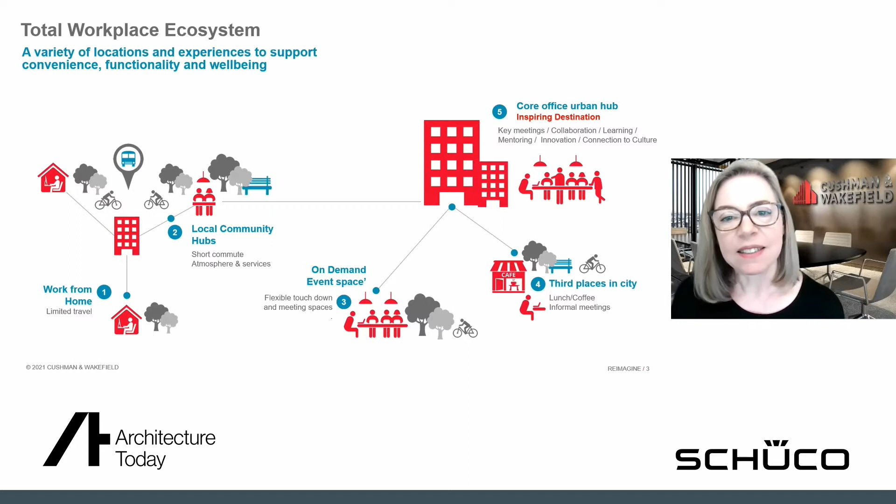But it has an important role to play as part of a much more complex workplace ecosystem, a variety of locations and experiences that will support convenience, functionality, and well-being. That is likely to be our home, areas within local communities that allow us short commutes but still access to people and services, on-demand event space, third places in cities. But critically, the office still becomes a very important destination, an inspiring destination to support collaboration, mentoring, learning, and innovation.

This is very important in terms of how we're going to design for the future of offices. But we need to think about what that means. When we talk about an ecosystem, we hear a lot of press at the moment around whether people are coming back to the office or working remotely. And we like to stress that the future is not binary — it's not either being in the office or being remote.

When we look at data on engagement, the diagram on the left, a Gallup poll on engagement, indicates that people who are in the office all of the time or in the office none of the time have the lowest engagement scores. It's really when you're in the office about 60 to 80% that your engagement score peaks.

When we look at what corporate occupiers are planning, the diagram on the right is some joint research we recently did with CoreNet. You can see on the left-hand side that corporate real estate executives were estimating hybrid work expectations to be 29% pre-pandemic. Since the pandemic, they see that moving to more than 80%. So people working in a dynamic way will increase to about 80% possibly — that's a big, big amount of people.

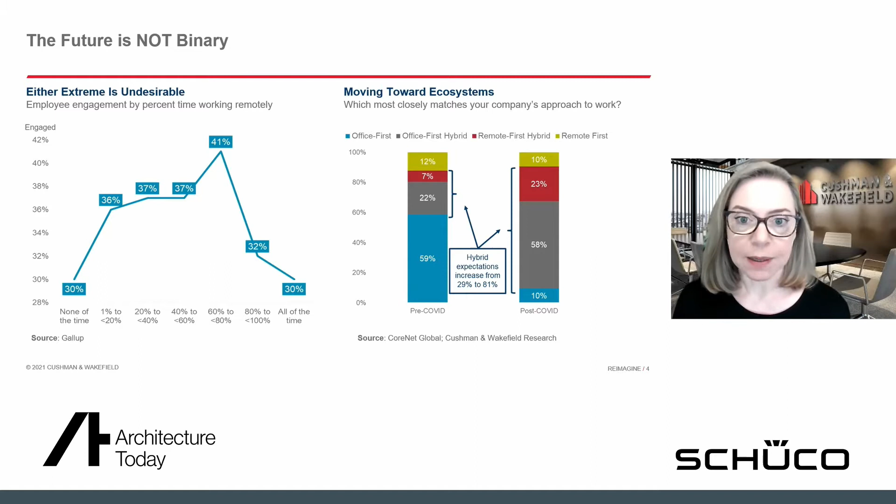What's critical to understand when we look at so much more of the office population having flexibility and working in a more dynamic way is, what does that mean? So we did some modeling to understand the probability of running into people when you reduce your office attendance from 5 days a week to 2 days a week. When you come into the same workplace with your colleagues 5 days a week, your probability of running into people is about 88%. When that is reduced to 2 days a week, that drops to 29%.

And even for smaller teams, the probability of 50% of the team being in the office on any given day drops down to 12%. So what this is telling us is that whilst we want flexibility, it is absolutely critical for that flexibility to be actively managed, so that when we do come into the office, we are running into and meeting the people that will drive our engagement and effectiveness to do our work better.

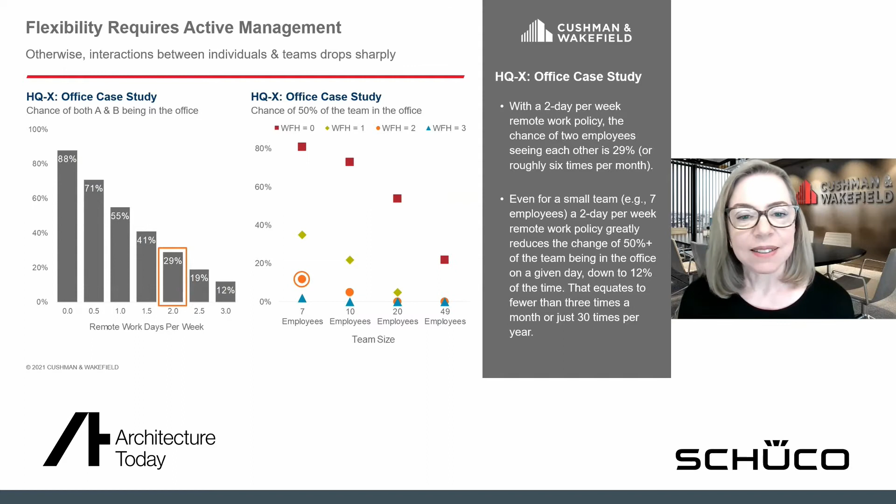This is a very important issue as to how we plan for the future workplace. What we're currently doing is we have pivoted our Experience Square Foot into 2.0, which begins to develop different profiles to define particular workplace components appropriate to who will come into the office, why they come in, what happens when they're actually in the office, what tasks they will be doing, and how the office is designed to respond to those tasks, while ensuring we're supporting virtual work.

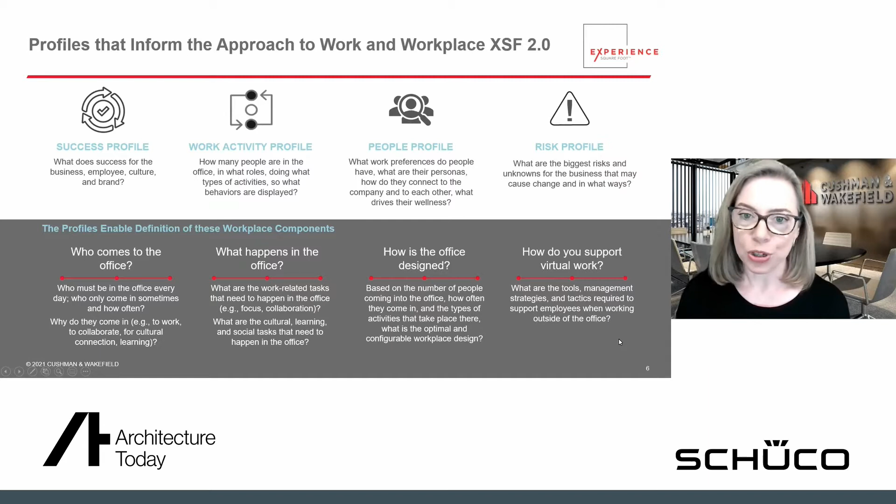This is driving us to look at a number of potential implications. The way space is currently allocated is no longer going to be viable, but we're seeing two different optionalities. Organizations are either realigning space — so within the same footprint, driving up more shared and amenity space to enhance connection and collaboration — or they're optimizing both space and experience by leveraging that ecosystem of different work environments, regaining things like lost commute time into productivity, and enabling their colleagues to use less space, but in better ways.

What that means is we're starting to look at interesting implications in terms of the importance of more blurring of activities, the ability to think about how we work, live, learn, and combine leisure across not just buildings but city quarters. The importance of looking at the workplace will not just be about the workplace itself, but actually the surrounding area, the amenities, the experiences that inspire people to come to the office.

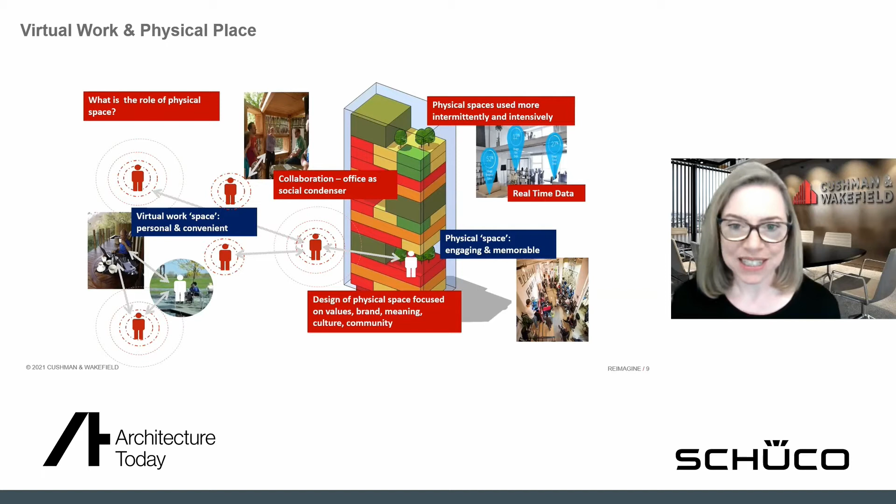So what does that mean in terms of the emerging insights? We're certainly at a place where we can begin to make hypotheses about what activities we can best do in person, such as knowledge transfers, collaboration, social interactions, and what the actual physical characteristics we need to design to enable those will be.

One of the most challenging will be the activities we do in a hybrid way, meaning some people will physically be together while others dial in remotely. So how do we create frictionless, equitable experiences for people in the room and for those not? That will require new types of interactive project spaces and meeting rooms with video and smart boards to create that same level of digital equity we've experienced through virtual collaboration in the last year.

And then lastly, understand the activities that can best happen remotely, such as process-driven or formal meetings or focused work, and where those will happen, most likely in people's homes or third spaces, and how we support them.

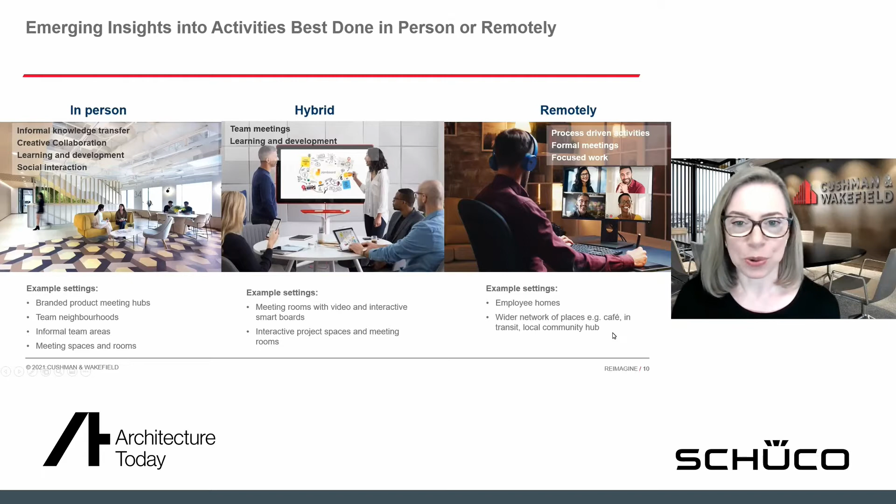When we look more specifically at what this might mean for interior space allocation, typically today 60% of office interiors are allocated to individual workspaces. We expect that to be reduced to about half that amount. That space will be redistributed to collaborative workspaces, which will make up about half the space in buildings, and to support spaces, social spaces, and well-being, which will increase from about 5% today to about 20% in the future.

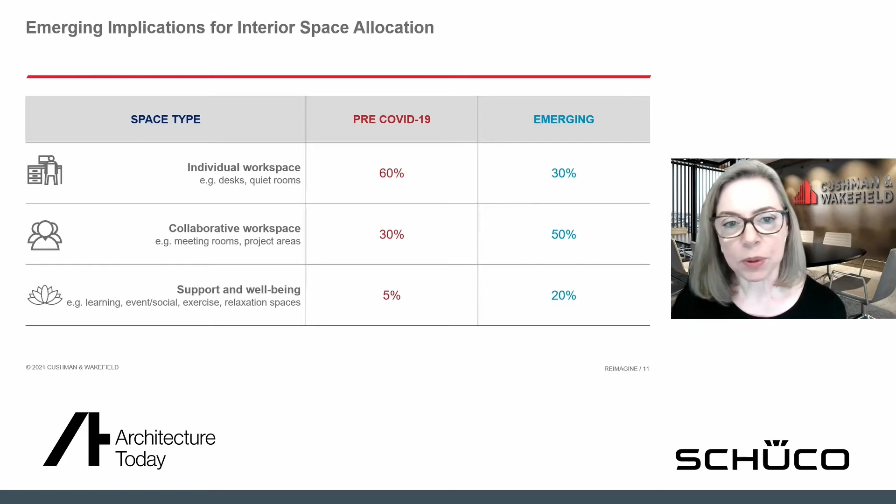The next set of implications are really exciting, and this is around emerging technology, real-time data, and user interfaces. I think this is where we'll find the most evolution in the next few years. Our ability to use real-time data to support well-being, how the building responds to our well-being. Interior air quality is a great example.

We've all become air quality experts in the last few months, so being able to track how air quality in the building affects our day-to-day work will be amazing. How does the building respond to our experience? Health and safety, testing and tracing—we've already seen many landlords and many occupiers put this in place.

The second layer, which technology can really help us drive, is optimization of both space and carbon. The ability to manage with real-time data, space and capacity management, building access, and energy and sustainability targets will only increase as we move forward.

And the last pillar will be around engagement. How do we ensure people can find their team, can have effective collaboration? How do we manage communities and hospitality and hybrid working effectiveness? These are really amazing areas of innovation at the moment, and I think there's a new app almost daily being launched to try and support one of these initiatives.

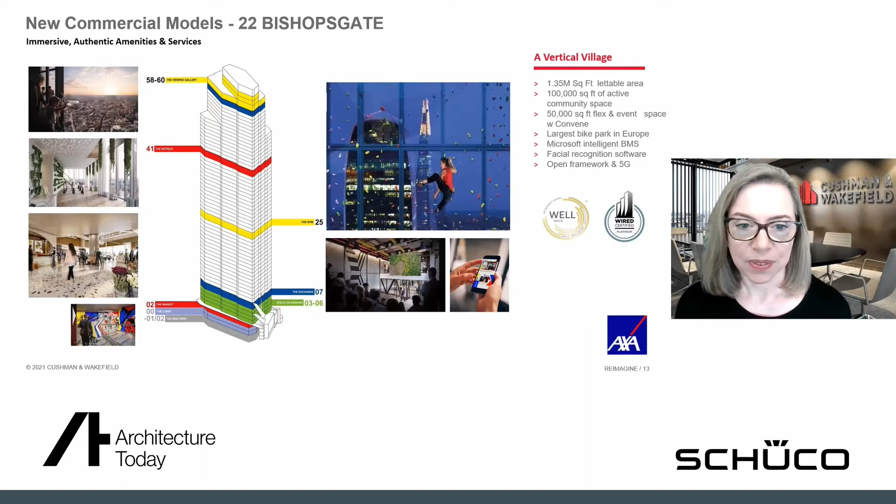What we're seeing in this type of model is a building that pulls together all of the trends we have seen in recent years, which in a post-pandemic world are no longer trends. They will now be basic expectations, because occupiers will expect their landlord to provide more than just a building, but a destination that is managed and curated to create unique experiences for their people, to bring that social condensing I described earlier, and at the same time, to support their agility, flexibility, and resiliency to changing business demand.

As we look to this type of building and these types of expectations, we will increasingly be shifting our expectations of performance from cost to value. It is not good enough anymore to just reduce space and reduce cost. It is important to focus on reducing the right things. So decreasing useless space, wasted time, absenteeism, stress, carbon, and outdated policies, and instead focusing on both individual and team productivity, but also inspiration and experience through increasing employee engagement, inclusion, ideas, collaboration, trust, resilience, and well-being.

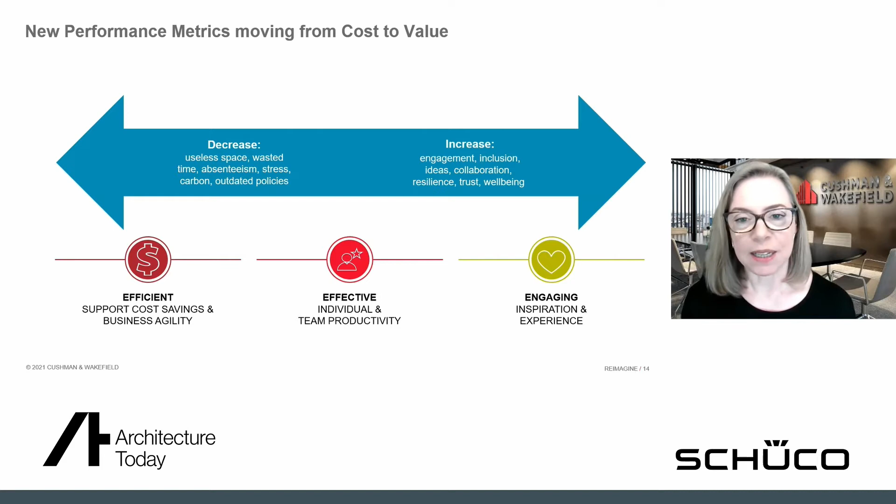The role of buildings to drive this moving forward will be critical. But in order for us to design a successful transformation towards a hybrid total workplace ecosystem, we need more than just the design of buildings. We need an integrated, multidisciplined approach that brings together a variety of what typically would have been diverse functions and budgets, aligned to goals that drive towards employee experience.

It's important to recognize that when we look at savings in any one of these areas, we need to reinvest in another. And in order to do that, we cannot take an approach that gives us a final design solution, but we need to take an agile product design approach, an iterative design approach to introduce hybrid working pilots, to test and iterate and engage the workforce and employees actively.

Move-in is no longer going to be the final objective, but move-in will be just one step in the process. And I think it's going to be a very exciting time to create very dynamic and iterative building solutions. Thank you very much.

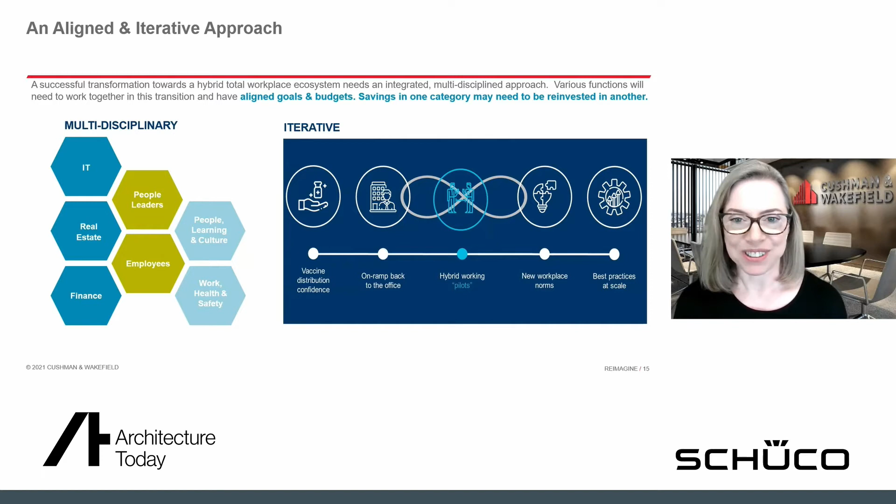Thank you, Despina. That was fascinating, not least because of the enormous amount of research you've done. I don't think I can even name 100 countries. But I was interested that actually a lot of what you said in this research seemed to confirm things we felt instinctively. And I just wondered, what surprised you most in the research?

Two things surprised us. First was the experience of younger people. We assumed that younger people, being more tech savvy, would actually adapt to remote working better. But what we found, given the challenges I raised earlier, was that they were struggling the most. They were missing social capital within their organizations, and they were missing space at home, and all of the things that help them build their careers, like mentoring and making those connections.

Baby boomers, on the other hand, who were the most skeptical around remote working, had the best experience of all, because they had both the social capital and the space. Now, that's a great opportunity because, of course, baby boomers still are the main decision makers in most organizations.

So given that sense of comfort that they've had in the last few months, that should help accelerate the process of new models moving forward.

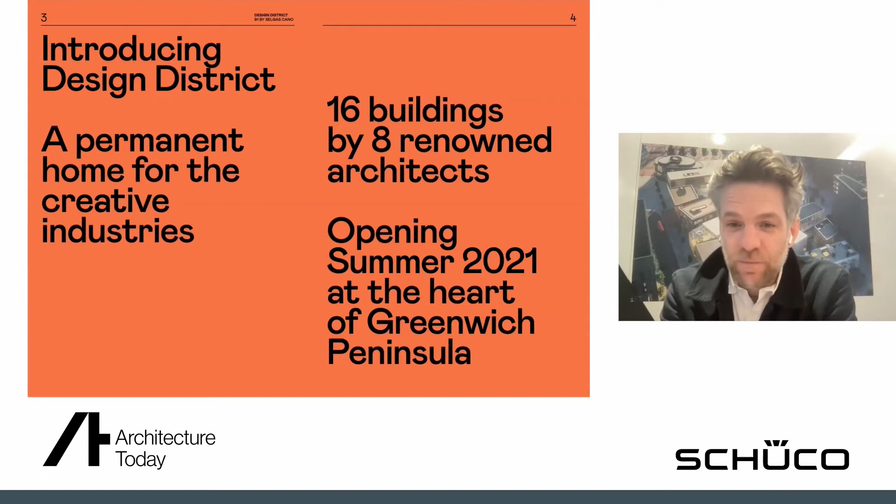So I'm here to talk to you a bit about the Design District, which is a permanent home for the creative industries. It's 16 buildings by 8 architects, opening this summer at the heart of the Greenwich Peninsula. For those who don't know, the Greenwich Peninsula is one of the largest regeneration sites in Europe, certainly in the UK—a 150-acre site. We're building 15,000 homes over the next 15 to 20 years. It's had a gross value of about £8.5 billion, and we're surrounded by 1.5 miles of the River Thames. Probably the easiest way for you to locate it in London is you can see the dome at the top and the proximity to Canary Wharf.

We currently have probably about 5,000 to 6,000 residents on site. We've built nearly 4,000 homes. Obviously, the O2 is a major attractor to the site, and the Design District is probably our first major mixed-use scheme in terms of bringing employment to the peninsula as part of the wider master plan. You can see the Design District is just hidden in there, right at the heart of the peninsula.

So in 2015, we commissioned Allies & Morrison to do a new master plan for the peninsula. Originally there was a master plan by Terry Farrell, done shortly after the millennium. We took over the scheme in, I think, 2013. Knight Dragon took over and redesigned the master plan in 2015 with the Design District right at the heart of it. The idea behind the original master plan was to increase the residential capacity on the site, but also reorganize the employment uses.

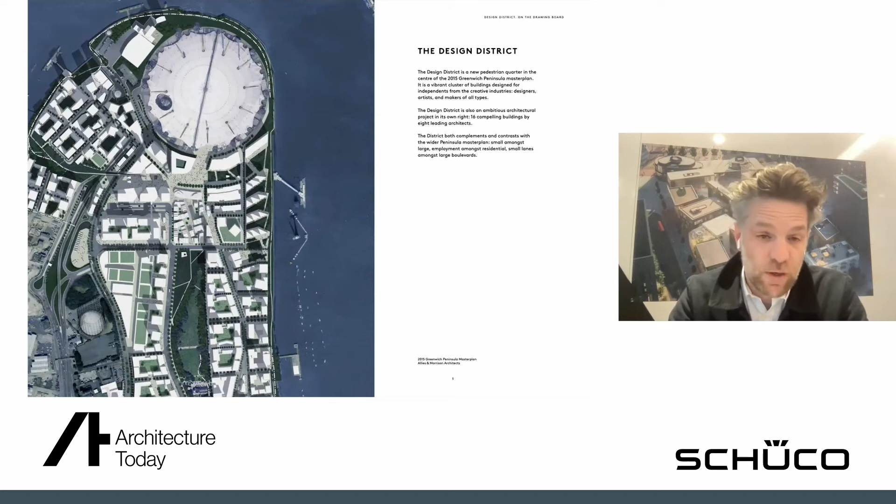And we then started really to focus on how we could attract the creative industries to the peninsula and what type of environment they would want to be in. So at the outset of the project, we set out some key principles.

And the first one was that it really had to be low cost. We had to have an affordable entry point for the creative industries. We know how tough it is in terms of some of the rents in London for creatives and artists to find a home, certainly within zones 1 to 4. And so that was really important.

The other thing we wanted was it had to be diverse. We wanted a diversity of occupiers, and we wanted it to be productive. So the idea that people actually made things - instead of sort of made in the UK, it would say made on Greenwich Peninsula, made in the design district. That was a really important idea.

And that it was small scale. So the buildings on the peninsula are predominantly tall buildings. And obviously we have the river around us, we have this fantastic light, and you have an environment that can take that height. But we wanted a neighborhood that was really a counterpoint to those, and that we thought would create a kind of human scale and intimate environment for people.

We also wanted it to be open, so that it wasn't just a single building carved up into lots of smaller studio spaces, but that it was a place. So it had streets and squares, it was accessible, it was immersive. And that's the last principle - that it was a place you could discover, you could wander around, and you could find the things that people were making, or find an interesting space to be in.

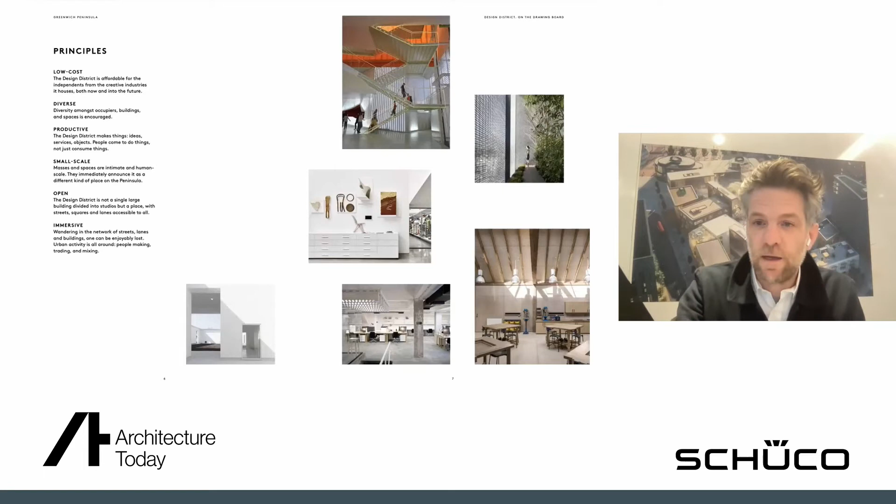At the same time, we started to try and think through how those buildings might work. And in terms of the vertical trend of the buildings, we thought that on the ground floor, where things needed to be noisy and messy, where there were workshops, those should be based on the ground floor, so they could open out, and that those floor plates could accommodate heavy things.

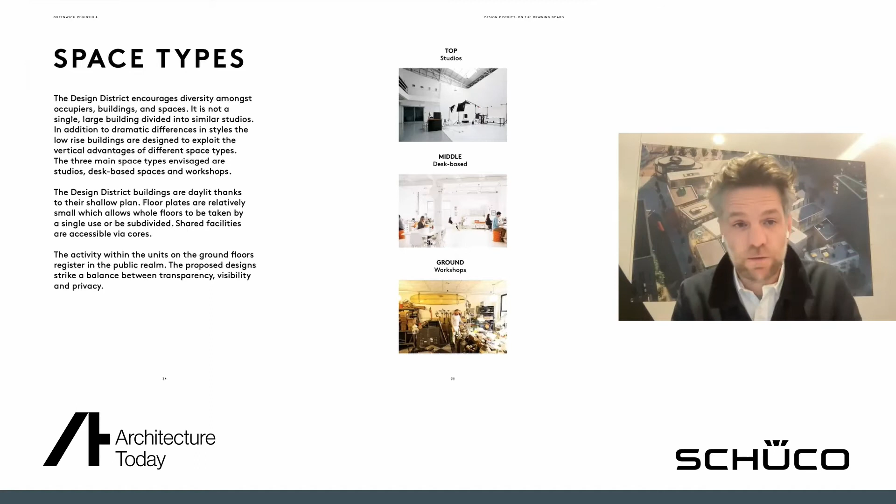Then on the middle floors, we felt that those needed to be more adaptable, so they're open plan, there's more desk-based activities. If you're a graphic designer or a fashion designer or an architect, you might come into one of those spaces. And then on the top of the buildings, we wanted to really take advantage of the natural light, the studio spaces, so they were well lit, and we thought of those as being predominantly photography studios or painting studios.

And those elements all fed into the brief, alongside wanting to take advantage of some little moments where we could, so that there were roof terraces where possible, that the courtyards were a really important part of giving the environment to the buildings and the character to the place, and that we could find efficiencies where possible within the buildings.

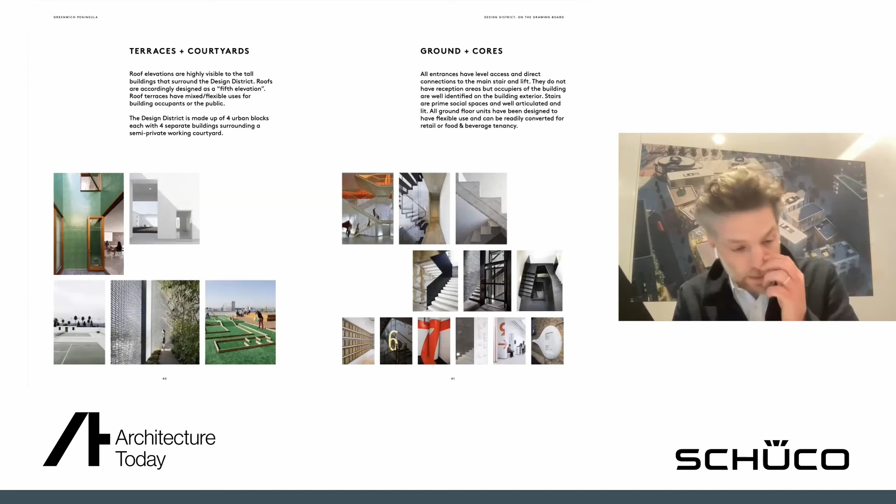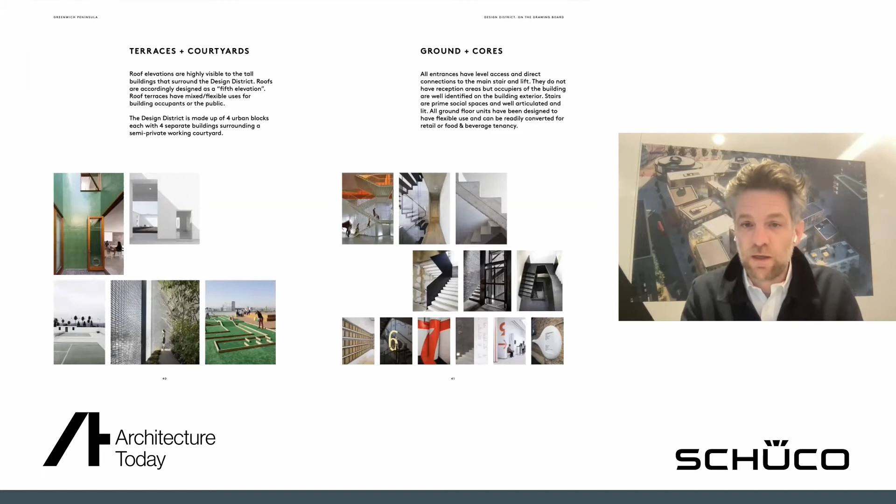So within the cores, for example, the buildings are shallow floor plates, so there is only one means of escape, which is the central core - one lift, one staircase. The entrances are self-managed, so there isn't a receptionist. If you ring the buzzer, someone will come down and open the door for you. And so we wanted to keep things as lean as possible. And I think that was really also speaking to keeping those rents low. That was that core driver.

We iterated on the master plan a great deal. And that focus on thinking about the elements I just discussed really brought us to a set of buildings which had these shallow floor plates - one that was to allow for natural ventilation, obviously that single core, but also it started to form an environment where we could carve out those public spaces.

So there's a central courtyard or a central main square, which gets 50% of direct sunlight at lunchtime. That was the key, that we wanted that pocket of sun for people to go and find in the middle of the day. And then there's 4 courtyards. And so you can see these clusters where the working courtyards are, and that's where those ground floors can spill out into those maker spaces.

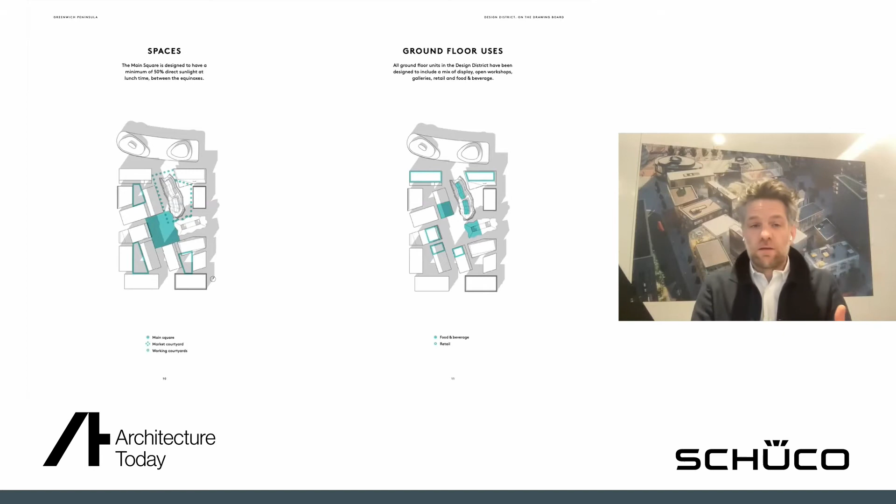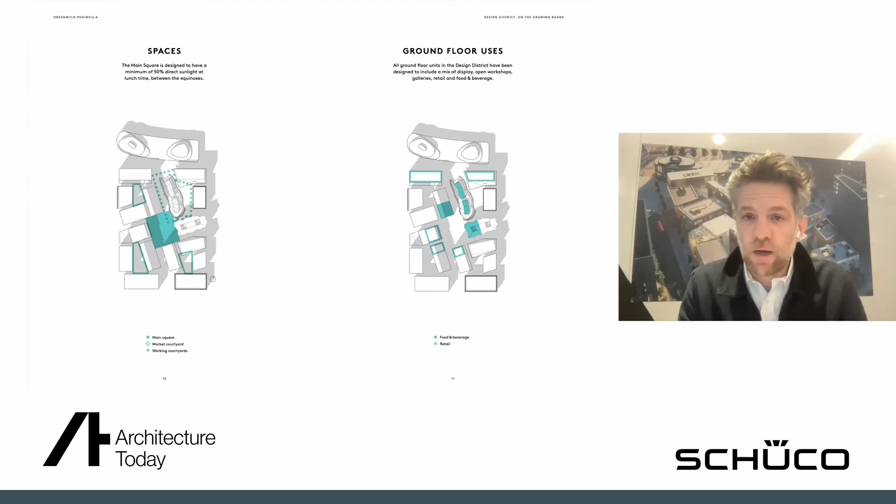Alongside those small buildings, we wanted to activate some of the ground uses, as well as there being workshops. So the idea was you could have some food and beverage, a cafe, some retail, and while they might not immediately come in, there was flexibility within those floor plates to activate those ground floors.

The other important aspect is that the district is fully pedestrianised.

There is a service route to allow for servicing at fixed hours, so deliveries can come in out of hours. If you're a furniture maker getting your furniture collected, that's pre-booked. Daily deliveries are organised by vehicles coming to the side of the district, with guys delivering packages to the buildings individually. So minimising vehicle circulation was a must. There's plenty of bicycle parking, so it's very much focused on the pedestrian environment.

There were other constraints to take into account, one being the Silvertown Tunnel, a major project coming, so the two buildings on the southern edge of the district will come in the future. Also linking into the Tide - at the time we were doing this project it was called the P5K - which is a major walkway by Diller Scofidio, looping all around the peninsula, and it needs to tie into the district in the future on that eastern edge.

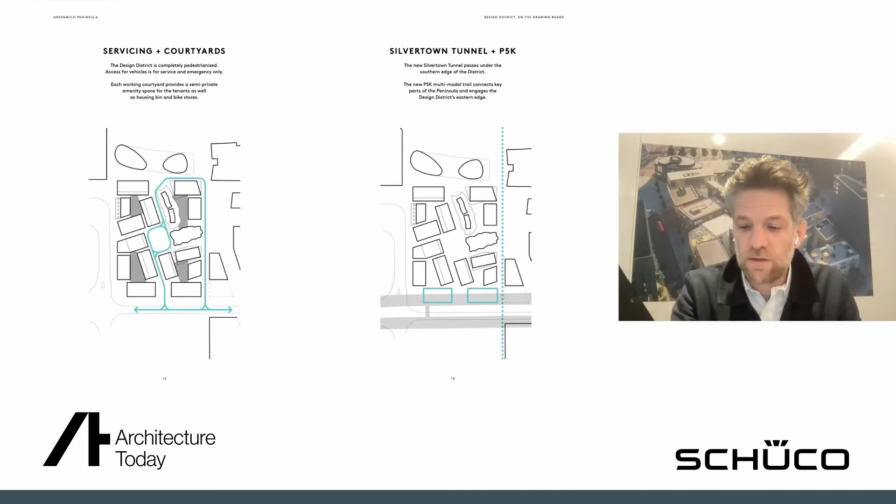Now, with the framework established, a brief for our architects, and a master plan emerging, the thing to do next was pick the architects. As a development business, you can imagine it took quite a lot of convincing to the development team that we would work with eight architects all at once.

But what we wanted to do was create a real mix of styles, and we did that purposely. We wanted to juxtapose these different voices and create what I refer to as wit and mess - cities are messy places, full of different idiosyncrasies of different types of buildings. One of the precedents we used to talk about for the project was Neal's Yard in Covent Garden, where you walk down a little side passage and the courtyard opens up, with lots of different colours and details within the buildings.

I think if you asked someone which bit of a city they like best, or their favourite part of London, they're more likely to choose a part of Camden, or Southwark, or a favourite courtyard in Clerkenwell. So when doing a project completely from scratch, we tried to find a way within the design process to capture the grain that builds up over a long period of time, but bring that into the development right from the off.

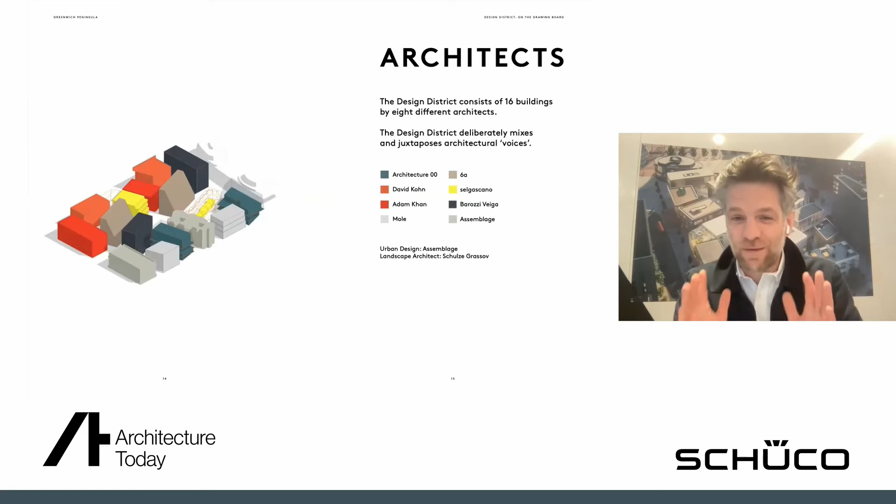I'll try and mention one as we go through the images. I haven't done these in order of preference, I decided to do them alphabetically. That was probably the fairest way to go through.

This is 6A, and they treated their buildings exactly the same. They chamfered the facade backwards to take advantage of the northwest light. The top floor is a 7.5 meter high studio, so it's a great event space with great natural light. In fact, we've got a photography studio looking at one of the spaces now. The buildings are a pair, so I'll show you the other one, which is green, this one is red. They're terrazzo covered with an aluminium facade to the other three sides of the building.

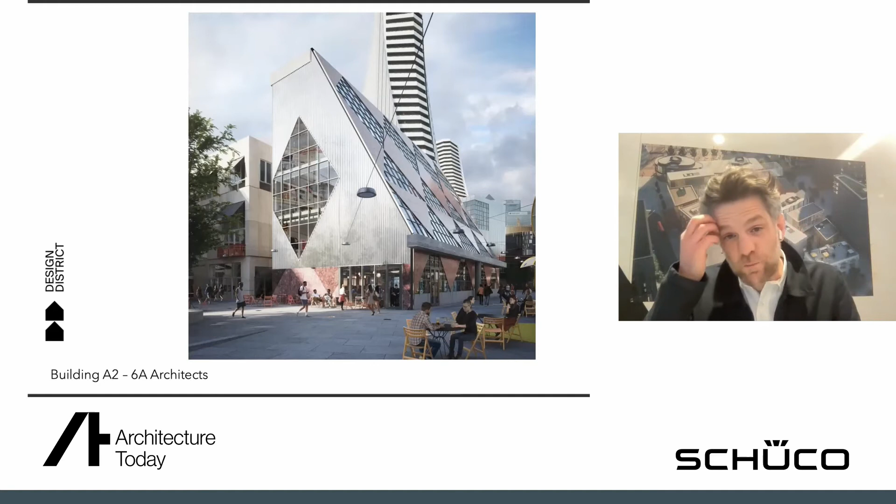When they chamfered their building, Barozzi Veiga, in the building in the background, had put in this huge corner window. They didn't know 6A was chamfering their building, but what it did was create this wonderful vista down the street. That was one of those moments of serendipity, where elements just arose by chance, and then were engineered by us along the way.

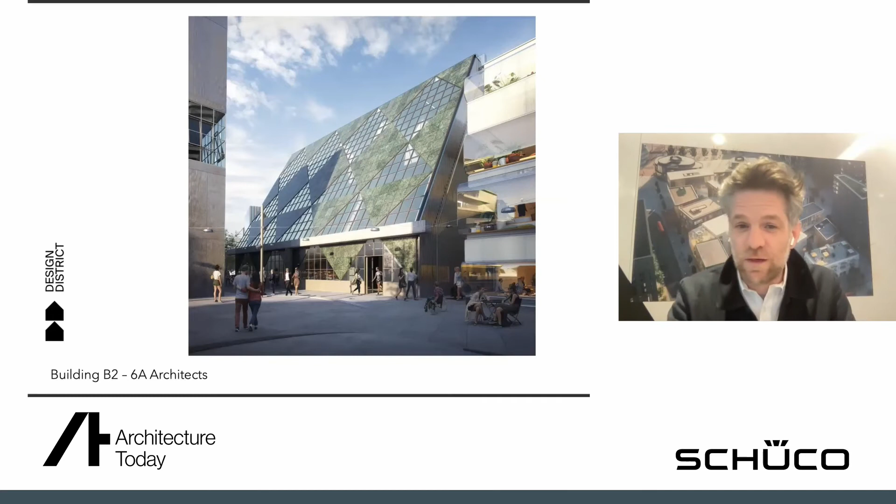They were great to see as they came forward. This is the other pair of buildings, and 6A really did talk about a pair, like the buildings at the Greenwich Maritime Museum seen as a pair, like pairs of London buses that always come along at once. That was a theme that ran through, whereas other architects treated their buildings separately.

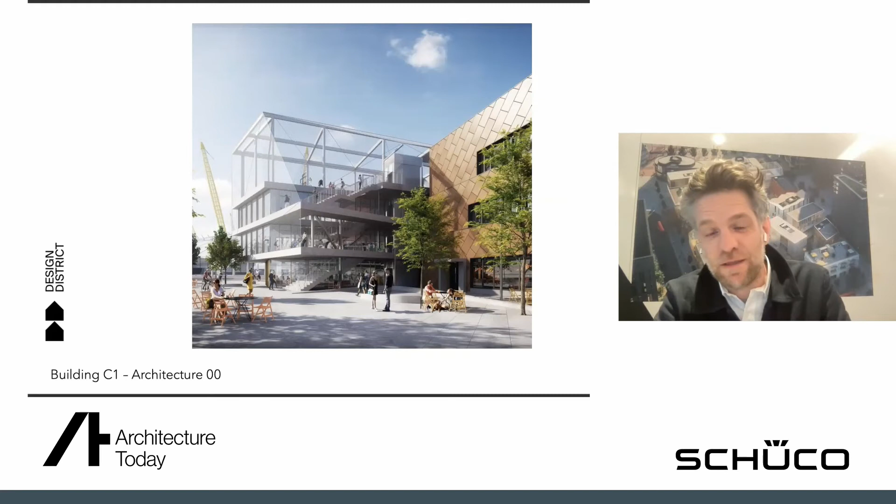Architecture 00 wrap their buildings in mesh, so all the circulation on this building is outside. That arose out of an argument with one of the development managers, who said they had too much circulation inside and not enough rentable area. So they put all the circulation outside, and in doing so allowed access to a public basketball court on the roof.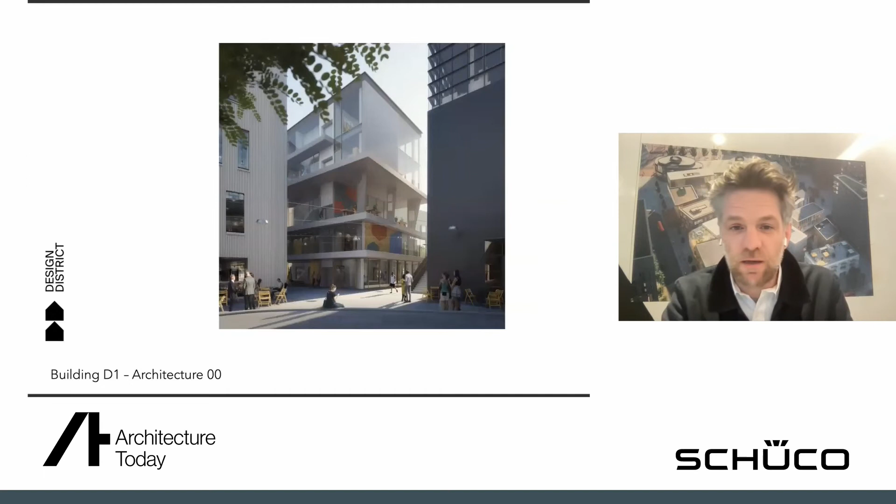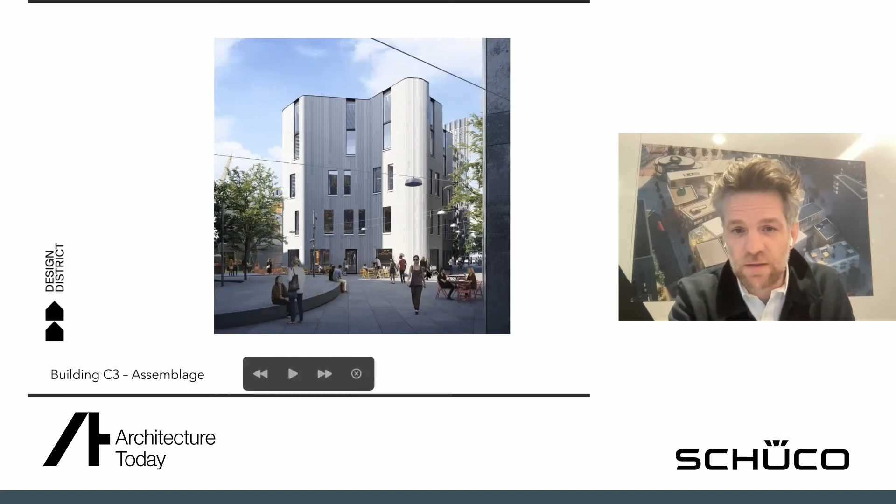Assemblage, the practice now called HNNA, rebranded this year, created this curving facade that allowed views in all different directions. Again, they took advantage of great top ceiling heights, with a big vaulted space at the top, and a double height space at ground floor addressing the main square where there's a cafe restaurant.

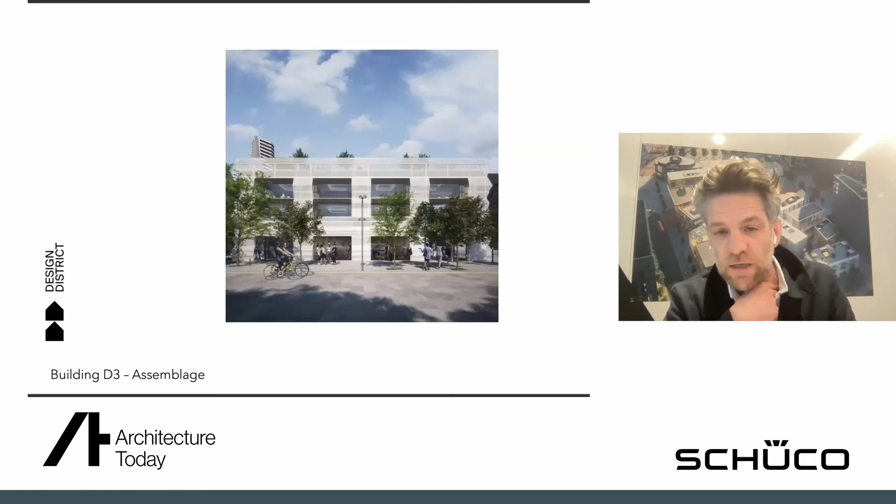This is the sister building, right to the south of the site. It has some external circulation, but really great studios overlooking the park, with this metal mesh providing solar shading to those spaces.

Barozzi Veiga, this building has already opened and has our first tenant, Ravensbourne Art College, who've taken it as their Institute of Creativity, their new postgrad and commercial offer coming out of Ravensbourne Art College.

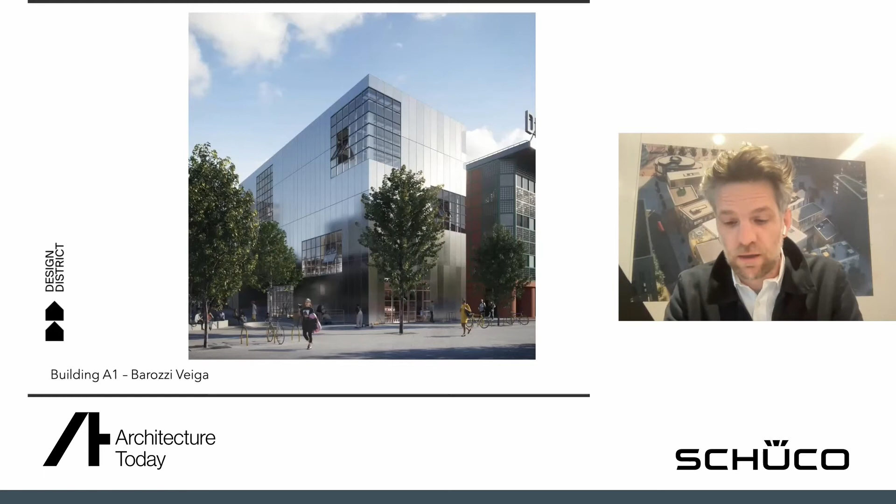This was really about simplifying the form of their building as much as they could. They pared it back, all about the massing and the end elevation, to the most simple form they could, then spent a lot of time playing with window and opening sizes to create the spaces. This roof space, the top floor, also has a 5.5 meter high ceiling. A really great space.

This is the sister building again, pretty much the same configuration, the same work on the end elevation, just clad in a different aluminium cladding - this is black rather than silver. Now, Adam Khan's buildings.

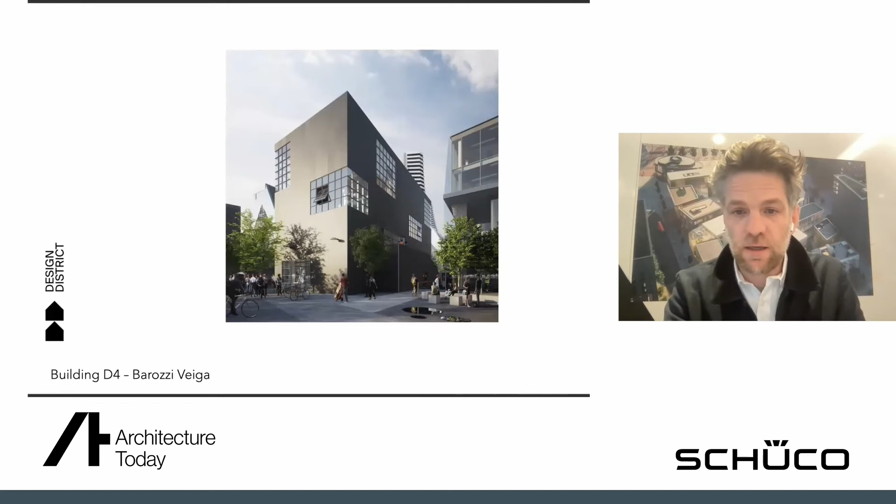This building is concrete, poured in situ. You can see it steps out subtly on each floor, but the walls are also poured in situ as well as the slab. This was all about that construction process, how the details evolved out of the shuttering, and leaving the imprints of the mess and some of the imperfections you get from pouring concrete.

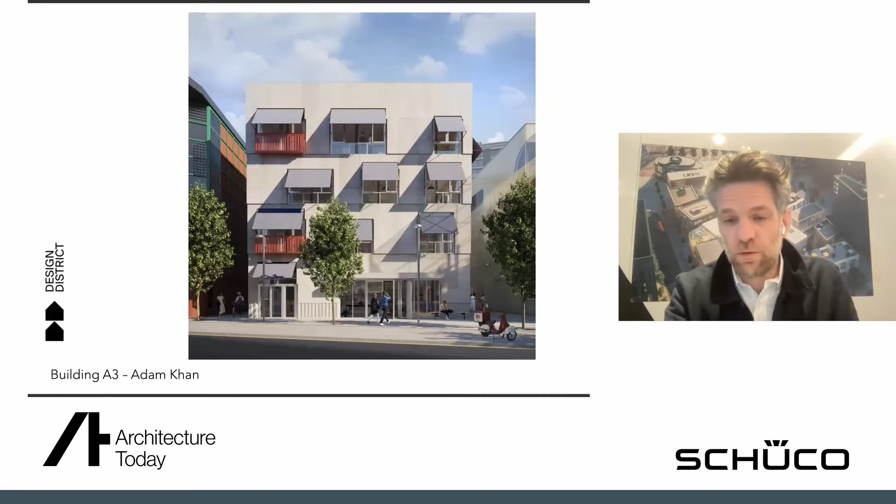This is the other building to the south of the park. Initially, he was hoping to clad this in metal when he first conceived it, but because the Silvertown tunnel sits underneath, we looked at changing this to a timber structure.

And so now actually this is a timber slatted CLT structure with a sort of candy colored facade, which really refers to, I think, a couple of artists that they were looking at in terms of getting inspiration for that cladding.

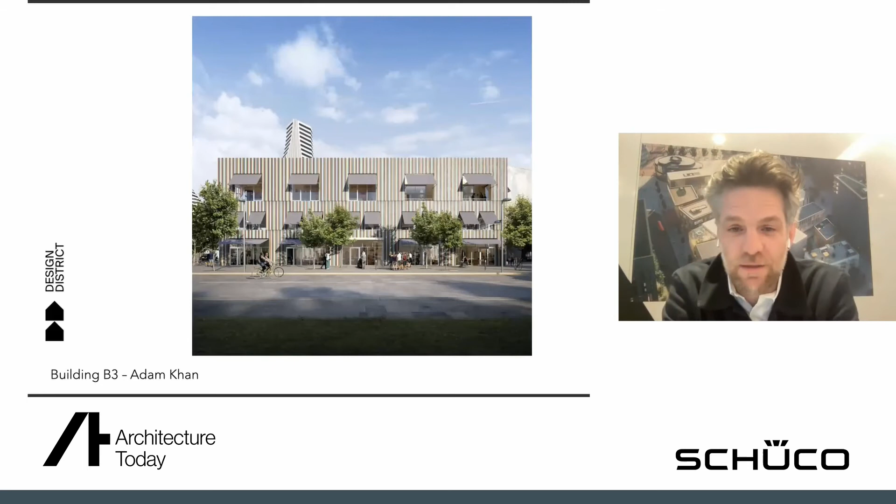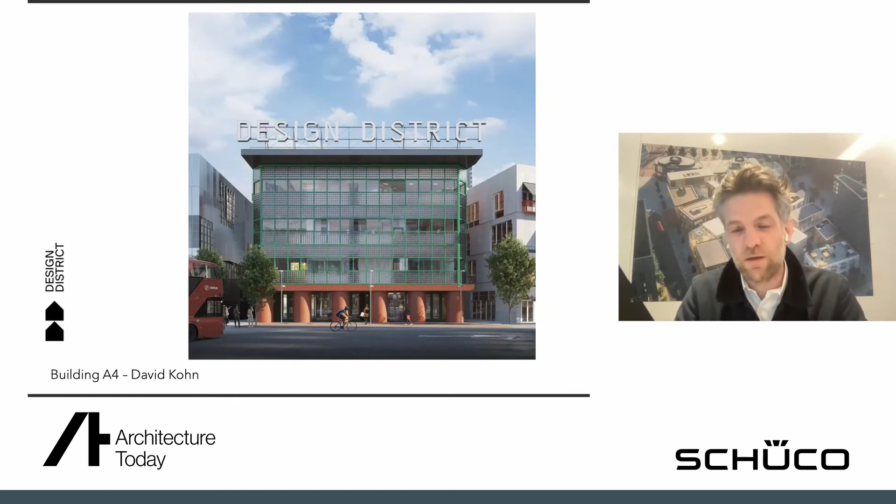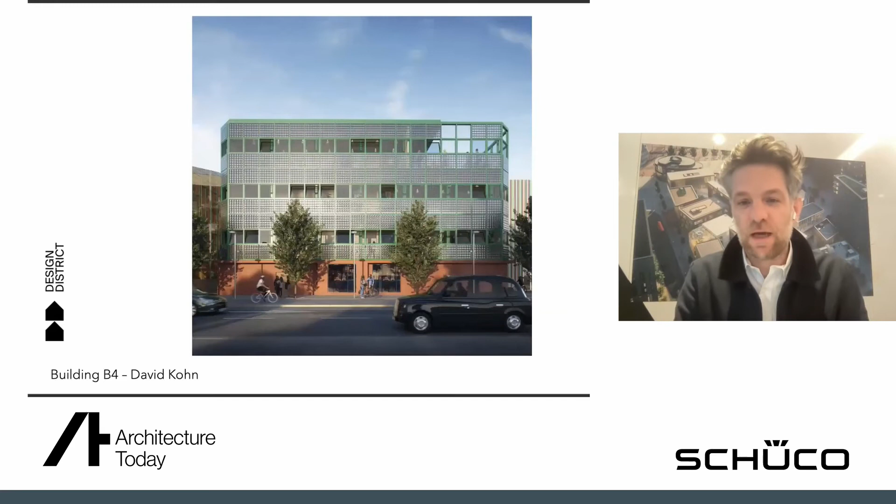So David was very influenced by the guilds in Venice, the scuole, and the role of sculpture on those buildings. So he's allowed for this sort of figurative pieces to be brought onto the corners of each of those buildings, and the same for the other building, also on the western facade, which follows the same theme.

Mole Architects. So this building, there used to be, unfortunately it's recently been taken down by Greenwich, but there used to be a fantastic gas holder on the peninsula. And the form of this building is inspired by the drum that sits within the gas holder. That's that step shape that you get.

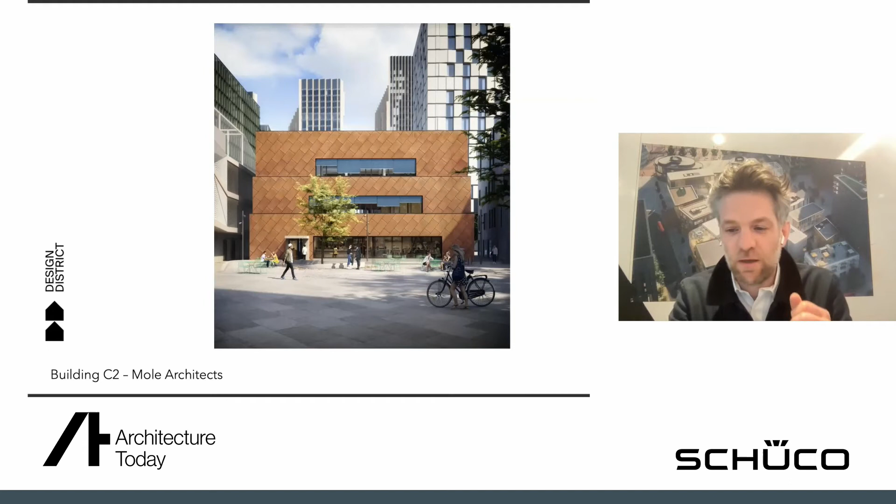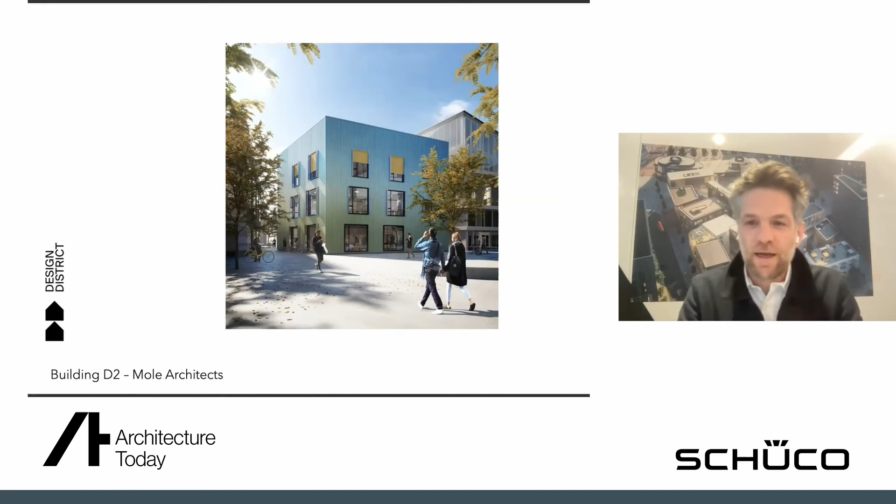And it's clad in Cor-Ten. And the reason for the Cor-Ten was that Meredith at Mole was interested in looking at the range of colors that you get in a gas flame. And so this was the orange that you get when you burn a gas flame. And the other building is clad in a metal cladding that has a sort of dichroic finish to the paint. So this sort of glows greeny blue. And so both these buildings were meant to be seen together as the flame of a gas fire.

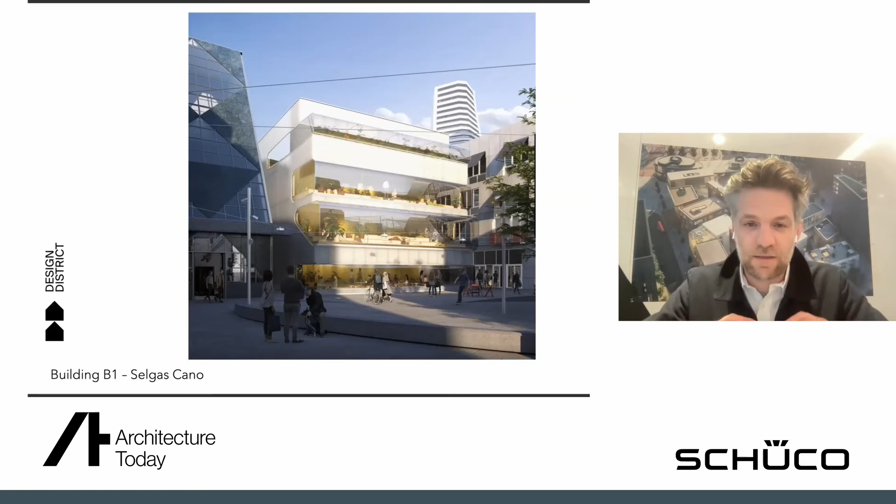And then Selgas Cano, so this is an office building, or sort of a workspace building, and you can see it very much picks up on their play on biophilia. There's a sort of winter garden to the other side. This has this sort of amazing seats that stick out into the main square. So it's full of colour and planting.

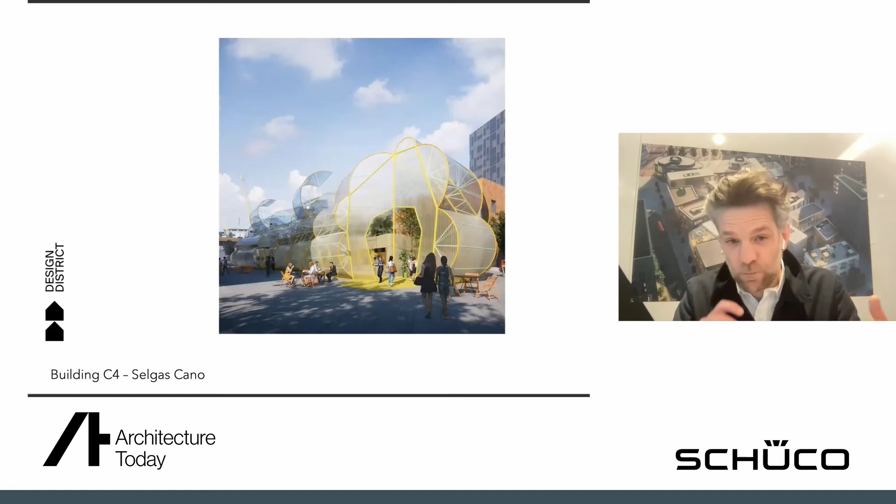And here is their other building, which is the Market Hall. So this is a building which is covered in ETFE. It has 6 market stalls for a food market and a bar, and you can climb up onto a raised platform at this level, which is filled with trees, and the roof of the food hall also opens up to the elements. So in good weather, it will be open to the sun.

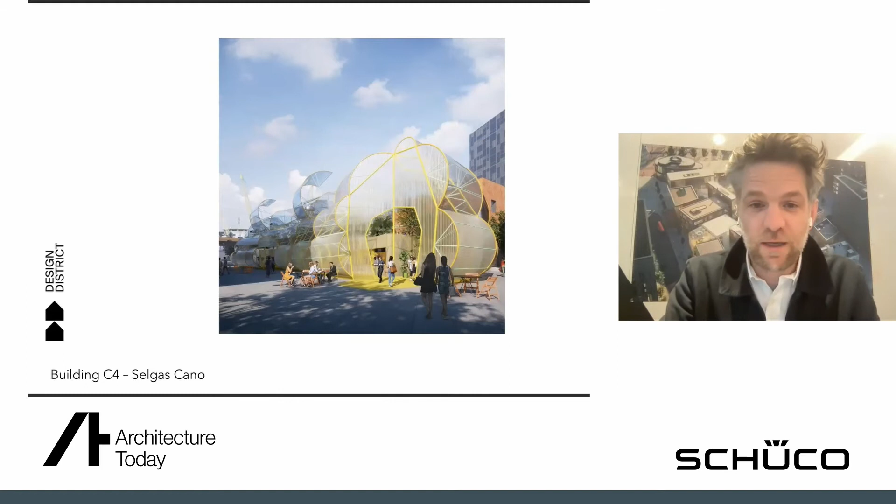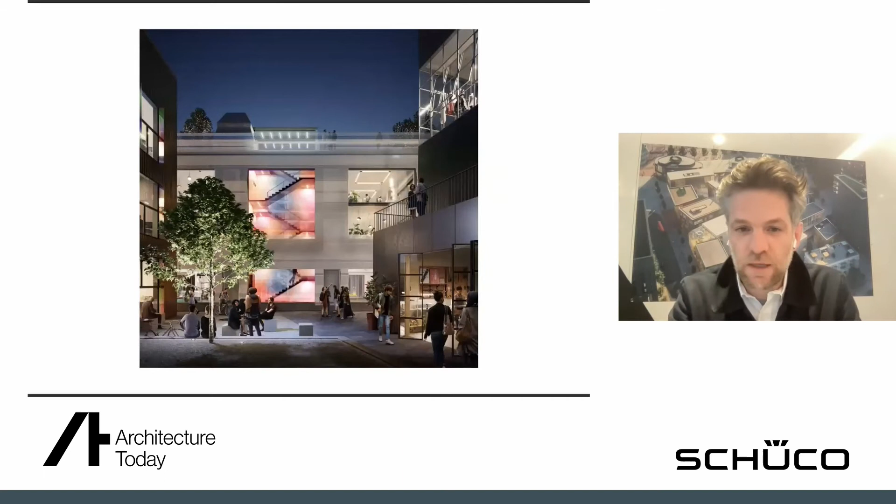So the phase we're at now is we're close to completing, and we are now very much out to market. As I said, Ravensbourne Art College have taken a space. The key for us is, I guess, we designed this pre-COVID. And we are now looking for tenants as we come out of that, hopefully, as we're coming out the other side. So for us, it's about having a flexibility of types of spaces.

We have multi-purpose spaces. We have small units, which is a sort of 2-3 people. We have a service studio offer, which we're calling the Bureau, which is essentially a co-working offer where you can either have a lounge membership or a hot desk. You can even book an office space for 3 days a week. So if you're working on those flexible hours, we have a kind of flexible offer in terms of a studio space. We have, like Ravensbourne, a couple of companies looking at taking a whole building. And then the on-off office was this idea that you could have a sort of flexible lease.

One of the things that we're also doing is trying to make the process as simple as possible. So there's one clear cost. The lease document can be read by the business owner, who is also probably doing all the admin and all those elements within the business. That's often the case for small independents. And so we want to make it as simple as possible so that people can get on and do what they want to do, which is design or make or be creative.

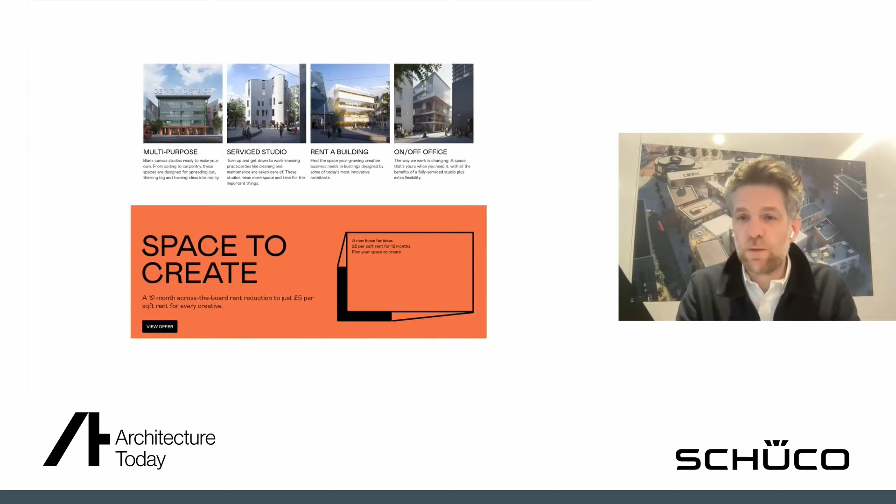What that allows us to do is, for example, a tenant taking a whole building will do a bit more heavy lifting than someone who might be a maker or an artist. So they will pay more rent to cross-subsidise an artist or a maker who isn't able to pay as much rent.

Some of the things that are about attracting people coming in - the canteen we think is a big pull, and obviously we hope to attract people coming to the O2 as well. So that's very much a big public offering.

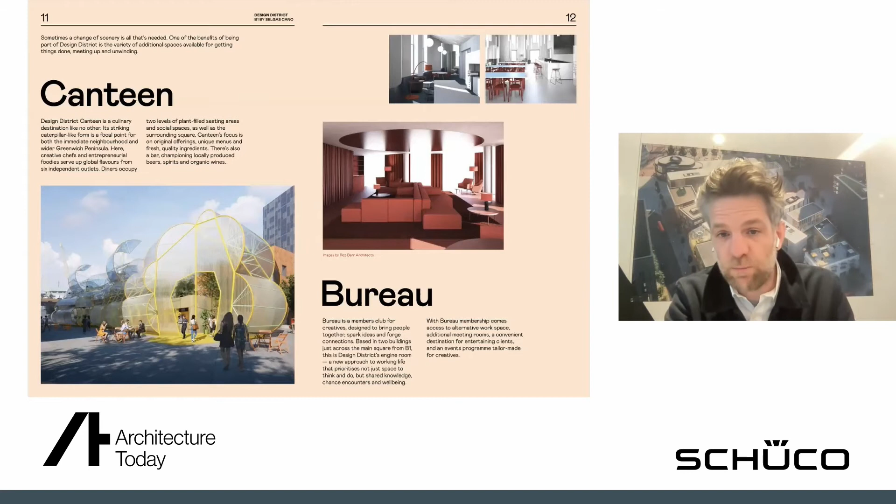The bureau, which is this co-working space, allows us a way of managing all the events and programming that happen across the district - whether that's access to the basketball court, events, workshops. It's really about managing that ecosystem in terms of getting tenants in and enjoying those spaces.

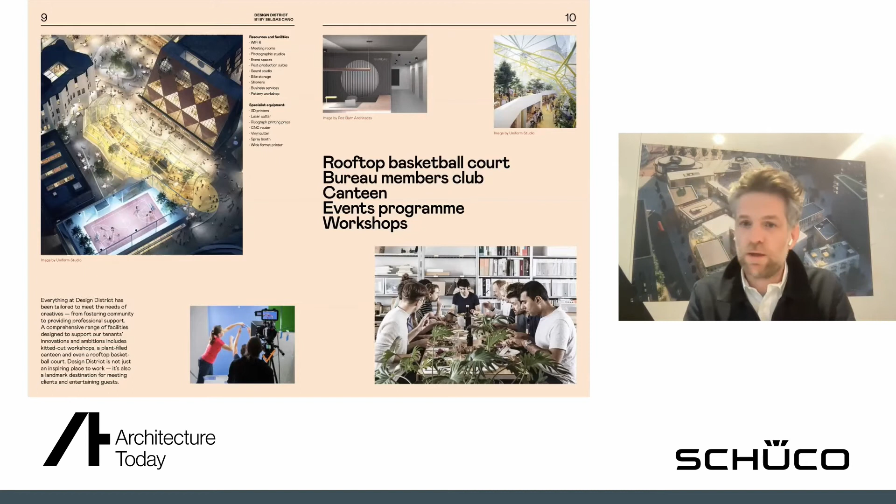It's also about allowing us to work out where connections can be made. We're as interested in, say, a patent lawyer coming in to help designers, or a great bookkeeper where people are looking for legal or financial advice - they're very much part of that ecosystem.

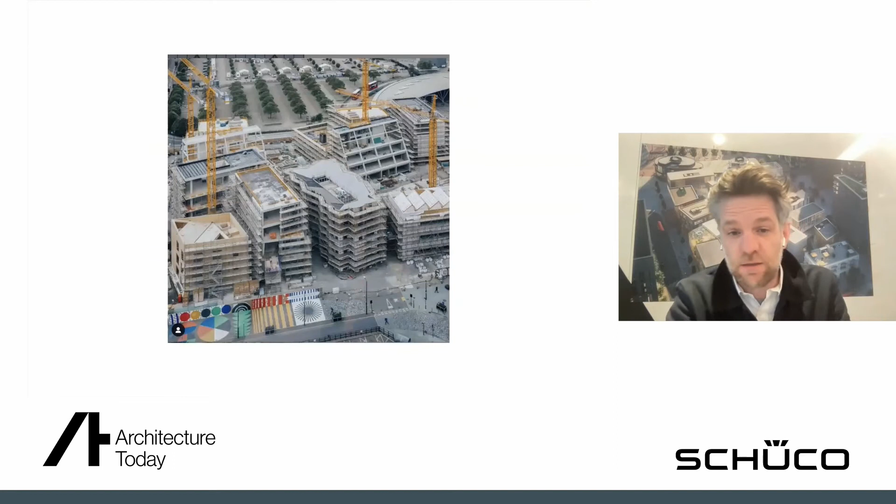Just to give you a short update on some construction images. This is the district as it looked last year during lockdown, and this is a photograph from last week. You can see the Mole building in the middle in the foreground, 6A's building, and our Barozzi Veiga at the back, Assemblage's building on the left, the market hall in the middle, and the basketball court.

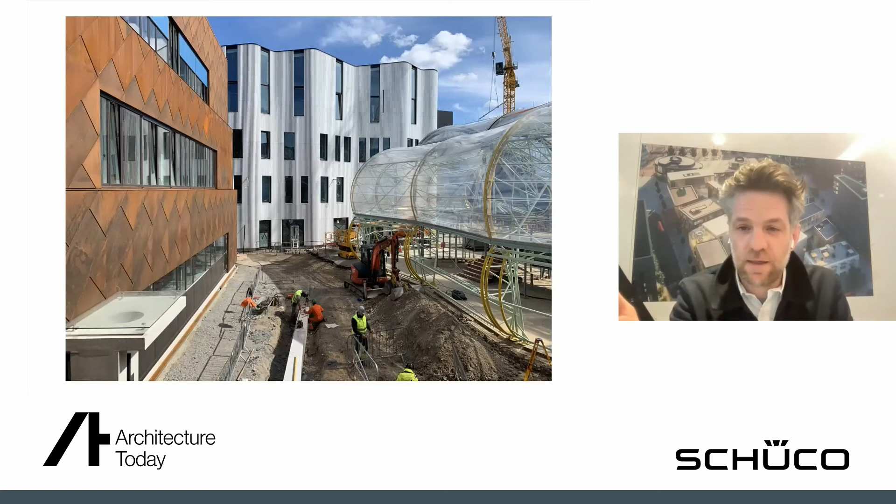Here is one of those courtyards - this is from the Mole building, the bureau, what will be one of the bureau buildings in the distance by Assemblage, and the market hall on the right. There's the metal mesh of the architecture.

And this is looking back, I think, from the Barozzi Veiga building, looking back up to the O2. There you can see the terrazzo going in on the facade. There's the Ravensbourne building, looking pretty much like the CGI, I hope.

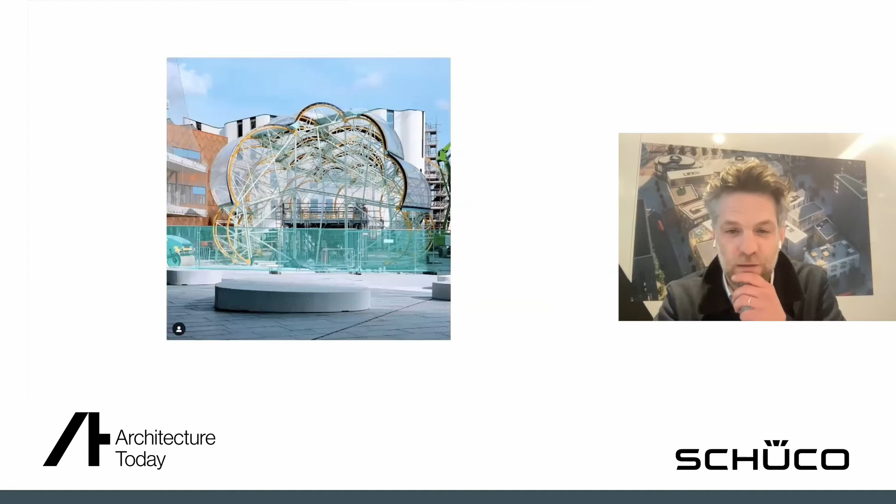That's the market hall from the main square as you come past going towards the O2 - so that's what you'll see. And there it is again, with the ETFE literally just gone on, being stretched into position.

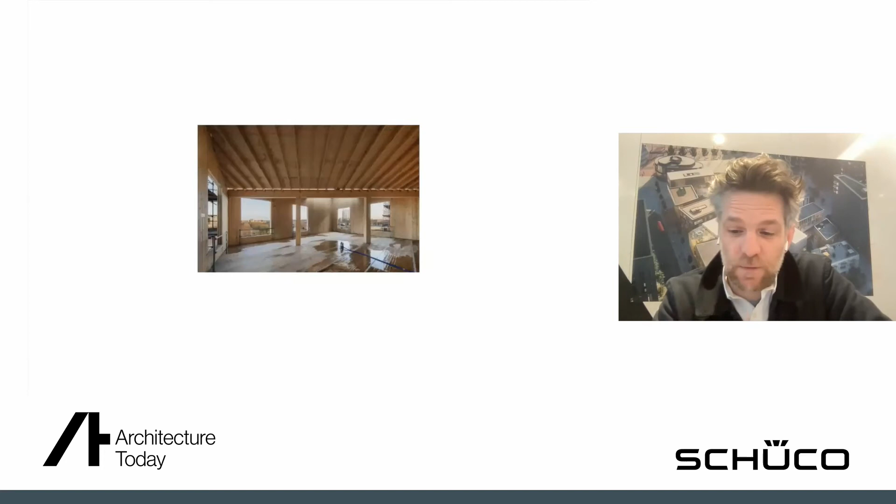This is an example of one of the spaces in the 6A building, and here is one of the CLT spaces in Mole's buildings. So that is where we've got to.

I'm very happy to take some questions on how we're bringing it forward and what the challenges have been in terms of getting it to its end state and getting tenants in. Thanks very much.

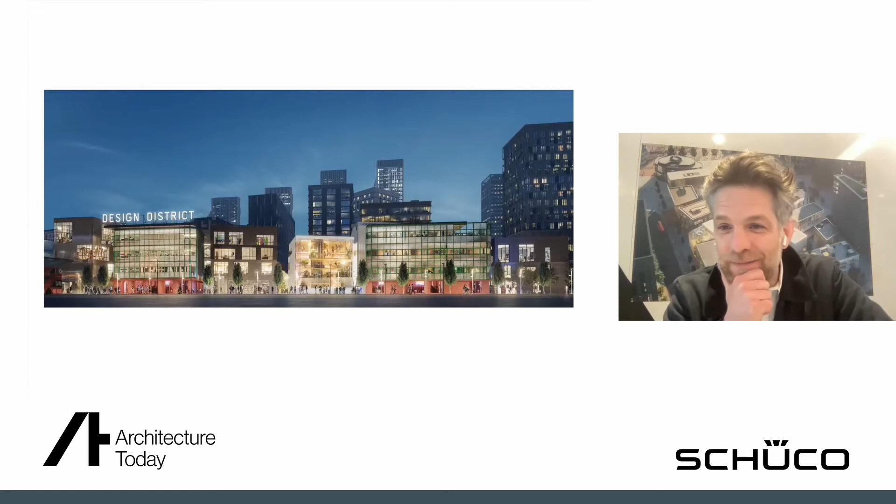Thank you, Matthew. And I love the idea of all those architects all beavering away and trying not to look at what the others are doing.

We've had some questions come in. I'm going to just put one of them to you now, and then we can discuss other stuff later. This is on the question of flexibility - you gave us a great explanation of the different tenure types and the different types of people that could come in.

But how flexible do you see this beyond the creative people? I mean, what if in, say, 20 years' time, that wasn't wanted? Could this, for example, be converted into housing?

I think, well, we've got a lot of housing coming forward on the peninsula, so I think we'd seen this as being an environment for creatives and makers, and that's very much been set out in partnership with the GLA on the project. So we hope that would stay. One of the reasons to have those smaller buildings was that we hoped they would preclude certain sizes of organisations coming to those buildings, that they would be attractive very much for small independents.

And I think the other thing that allowed us to do is, because the buildings were designed for non-residential use, we were actually able to get some proximities between those buildings, some of those small alleyways, which I don't think we would have done had we been designing with residential in mind.

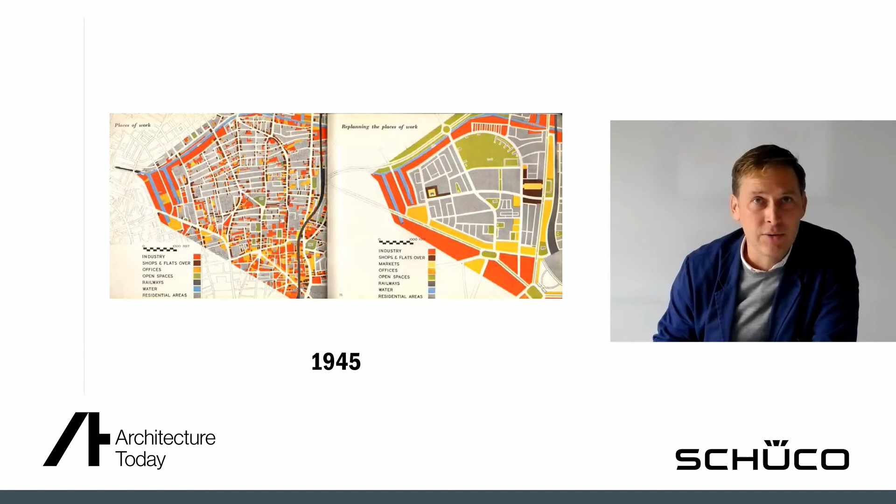So it's quite interesting to see how the organic hodgepodge London becomes, in the eyes of a planner, a much more organised place. I don't think it ever actually happened, thankfully, and instead London continues to be a much more radical and freewheeling place, especially I think in areas like Shoreditch, and a much more mixed up place than Abercrombie would have liked.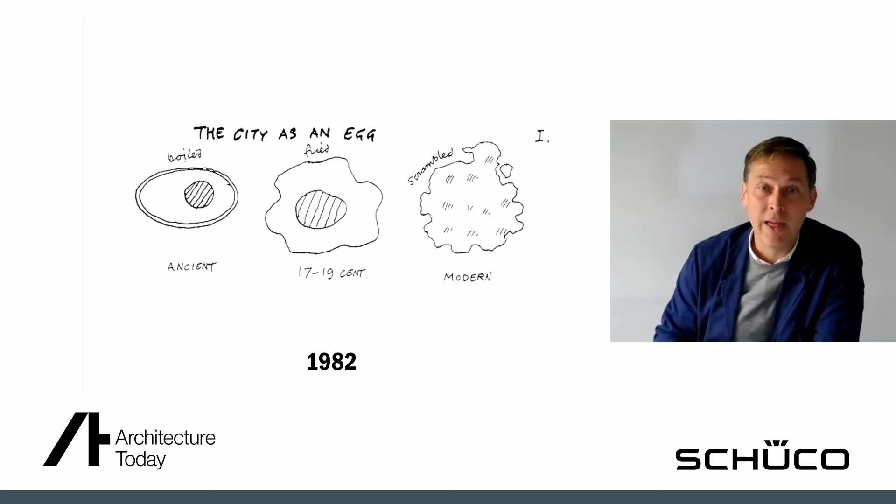This is a classic slide that many people will know, about the way in which cities are organised. And I think the one on the right, drawn in 1982, sort of says where we are now in London, and I think where we will go even more as we come out of this pandemic, and start to use the city in a different and potentially more personalised, more local way. That ultimately informs the way that we have to design buildings.

Cedric Price isn't someone I pretend to know a huge amount about, although I was fortunate enough to meet him a few times to talk about work. Indeed, he used to crit when I was doing my architectural studies at UCL. At that point, the ideas that he had pursued in different ways over a long time about buildings that anticipated change were very powerful.

Generator is the name of one of his projects, which perhaps anticipates change more than any of the others, in that it instigates change before it is required by the user. They were projects often that achieved this level of flexibility or change through relatively high levels of servicing, effectively black box technology - you press a button and something changes.

And in a way that affected the work that I produced at the time. This is an excerpt from a project that I did at UCL, where we tried to propose buildings that could be both places of work and places that you live, and indeed places that you went to in your spare time. But the same building would change over the course of a day.

Not only was it a relatively high-tech proposition, it was also a proposition that related to financial value, rather perhaps than the personal choice of the user. And I think in both of these respects, times have changed a great deal over the last 20 years, since Cedric Price died and this project was done.

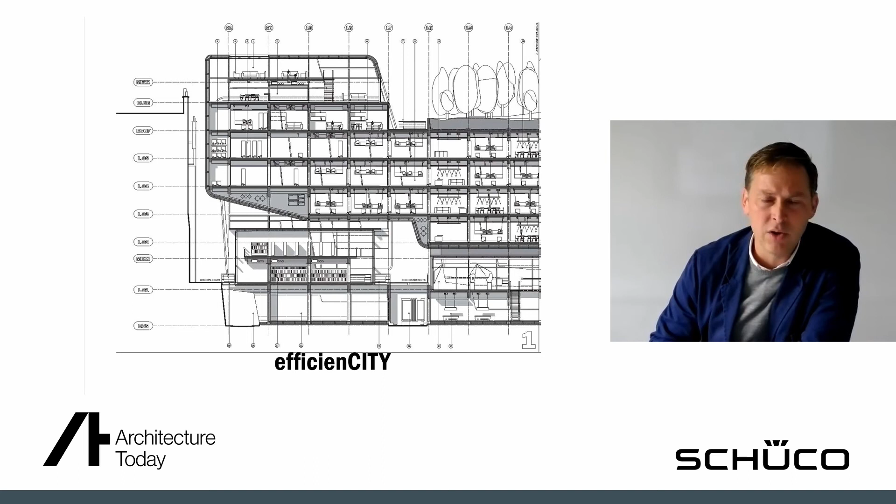A lot of the work that we've done in practice, I think, pursues an agenda of loose fit change rather than highly serviced change. And of course, many of the buildings that we've worked on over the years prove this to be entirely achievable.

So a familiar environment to me is the building our office is in, Morelands in Clerkenwell, which is a 19th century factory. It's a steel frame building as it happens, with a brick skin that's proven very flexible over time.

And then there's a building called the Tea Building in Shoreditch, which in a sense does it better than any of them. A building bought by Derwent, our client here for 15 years on this project, as a building they thought they might knock down and replace with a brand new building, in a sort of Cedric Price way. Instead, it turned out to be such a good, flexible, low-cost building that they could use it very differently, simultaneously and over time. So, of course, it becomes a place of work.

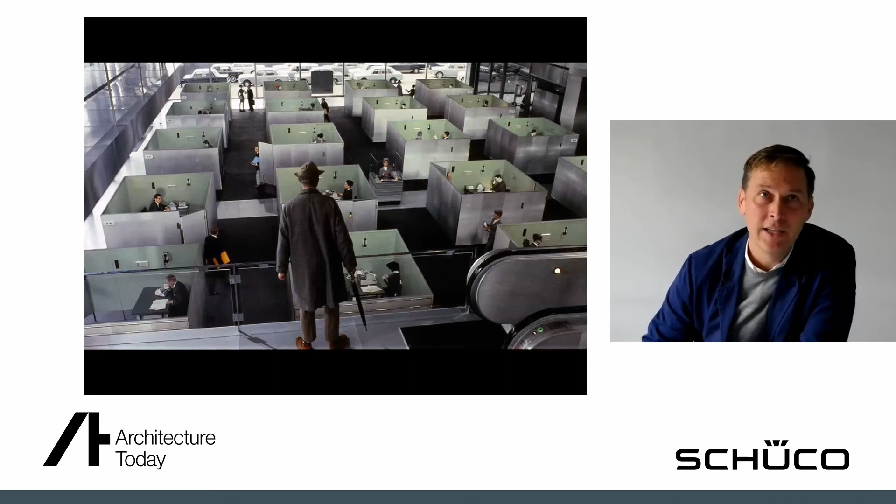To look directly at the world of work: this still from Jacques Tati's film Playtime shows it as a horrible, mechanistic, very modern place. We move towards a much more freewheeling version of life, and in a sense that becomes a brief for the architect.

Along the way, we've pursued ideas about how legislation might change, to try to create a regulatory environment where buildings that anticipate and enable change can go through the system. But what I really think is most pertinent now is how you design them.

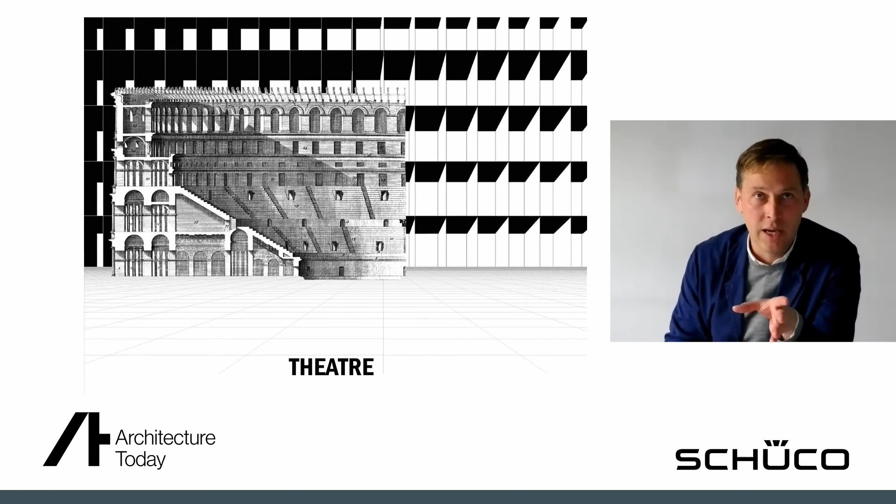We've said at AHMM for a long time that you build buildings big, you build them simple, you build them naturally ventilated if at all possible, and you accept that the framework you establish will always contain a series of different uses, different stage sets.

The fit-out ultimately comes down to the level of the things people carry with them during the day. So a big, simple frame, if generous enough, can be inhabited in a number of different ways. Those are the kinds of buildings we think anticipate change the best.

Three buildings we've built or will soon build, delivered over about 15 years, track how an architectural response to that brief changes as we better understand how to address the climate change agenda and how to build with low carbon technology. White Collar Factory is the first of these buildings.

I'll go through it relatively quickly—it's a 10-year process I'll try to explain in 3 minutes. It sits at Old Street Roundabout, from that Abercrombie plan, and it replaced a building, or a pair of buildings really, Transworld House, which were from the 60s.

There's also a building from the 20s behind it. These older buildings weren't particularly attractive, nor did they use the site efficiently, and they could not be reused—in contrast to other buildings we address now, where we try to keep as much as we can. I'll come to that in the next example.

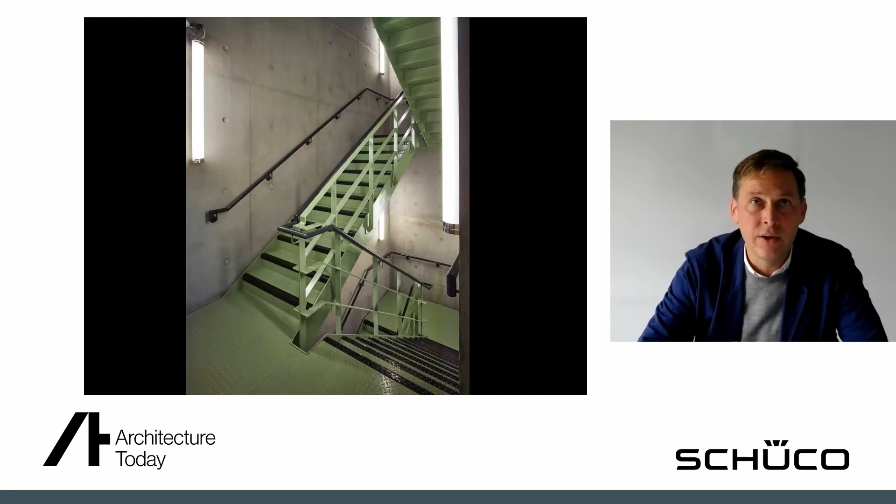the office spaces themselves, with, as I said before, an approach to zero dilapidation, zero waste over time. And that is another consideration we come back to in a moment when we design buildings today.

At the top of the building, there are some double height spaces, and there is the traffic light system. The red traffic light at the top is for all users, and it's linked to the way in which the building's services are controlled, and it tells you whether or not it's a good day to open a window. So if it's too hot outside or too cold, and you therefore boost the need for cooling or heating and the energy consumption of the building, it says red, and you rely on the systems. If it's moderate, sort of mid-season outside, then it goes green and lets you know what to do.

We also designed a system here in plywood, which we call Project Jack, for the fit out of 3 floors towards the bottom of the building for the office group, which is a reusable plywood partitioning system. So here we're attempting not only to follow through the architectural spirit of the building, but also to create a flexible system of fit out that can be reused over time. Because of course, we can consider and control the amount of carbon produced by the building in its original construction, but it is quite difficult to control it over time. And systems like this, we believe, will help.

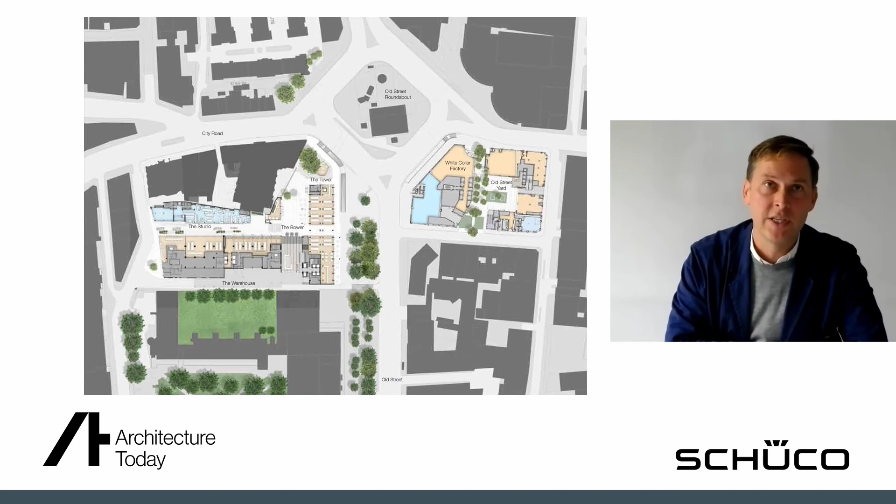It's interesting just for a moment to look at this in the context of our own occupation. AHMM, as I said, are in this building called Morelands, which is about 500 metres away from White Collar Factory. We have actually now taken space in White Collar Factory. So on the left is our office in a Victorian building, and on the right is our office in a brand new build, relatively new building, both of which actually pursue the same goals, which is tall, well-lit, well-ventilated spaces with lots of user control. And we've used Project Jack in our own meeting room fit out and so on there.

So following White Collar Factory, we began working on the post building, now complete, for Brockton and Oxford, further towards the West End. It's on Museum Street and High Holborn, just east of Centre Point and Tottenham Court Road. This building is in part a refurbishment, unlike White Collar Factory. It uses the bones of the previous building on the site, a sorting office built for the Royal Mail in the 1960s. And the amazing thing about this, apart from all the details about the Underground Railway and so on, is that this building was built because it had an industrial function rather than a more straightforward office function. It was built tremendously generously. It had a huge concrete frame, had very tall floor to ceilings. It had industrial equipment that looked more like a tech fit out than ever.

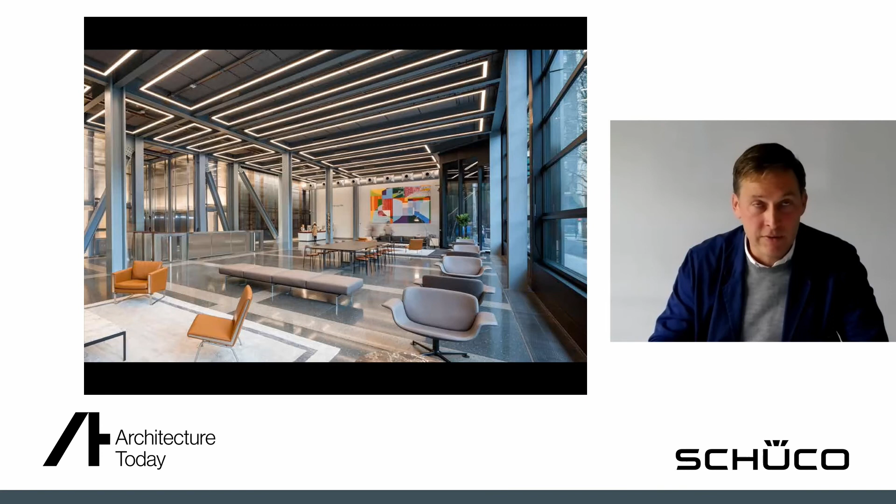So this is all about height, generosity, and these things lead over time, we believe, to the flexibility that enables change without demolition, without the costs that come with it, environmental and financial.

Photographs here of the lift lobby, for example, the ground floor, begin to show the simple steel core inserted through the building. And this photograph and the next one show the office environment that's created. So this environment is more akin, I think, to an industrial environment than it is, if you like, a traditional office. In contrast to White Collar Factory, it is effectively a sealed building with a high level of servicing.

The retention of existing structure saved nearly 2,000 tonnes of carbon. That sounds great. It's nowhere near enough, actually. And the next project that I'll show tries to demonstrate how a new building now addresses that in a more radical way. But ultimately, this building, with its very generous spaces, should, we believe, now set up a new 100-year lifespan, which can accommodate things that we don't anticipate at this point in time.

At the top of the building, a series of generous roof terraces also add to the city's biodiversity. And I think as the agenda moves ever closer towards our effect on the environment, these spaces, seen here before people really took occupation, seen here during lockdown, become ever more important.

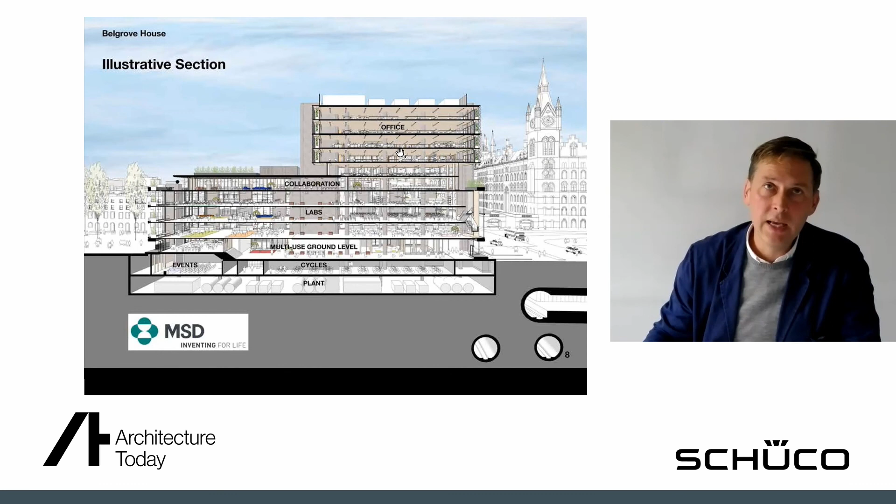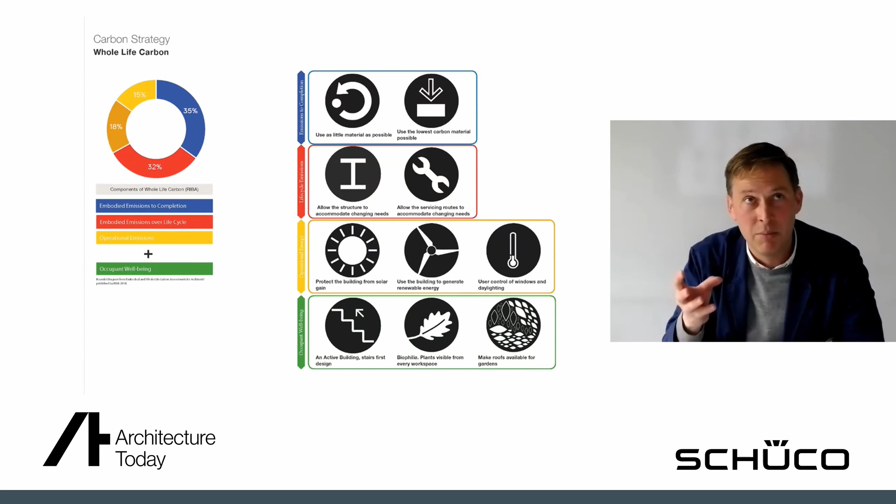So the design that we've brought forward, even though it has a concrete frame at lower levels for those laboratories, beats the RIBA target for 2020, falls slightly short of the RIBA target for 2025, but is considerably better than the current industry standard in terms of kilograms of carbon per metre squared.

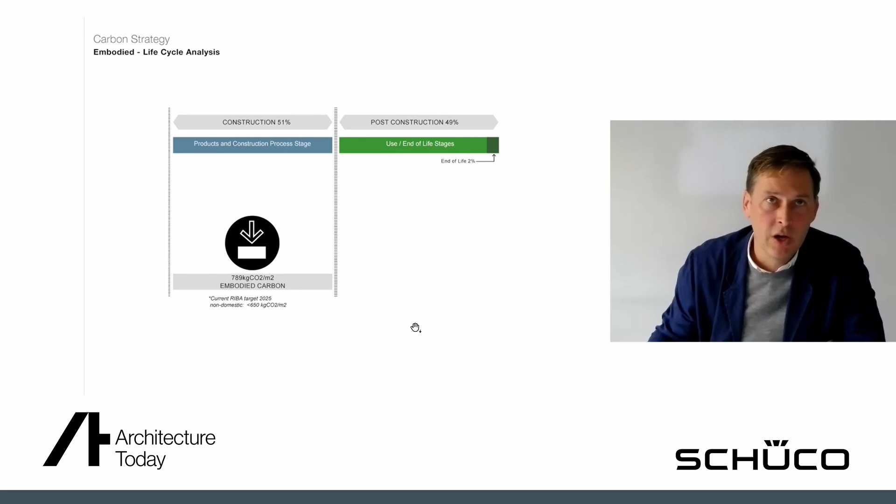And we've also been able, working with Atelier 10, to look at operational carbon. Conscious of time, I'll just flick to this slide. We understand better now how things use power in buildings, and thankfully heating and cooling is a relatively minor amount now. This slide explains how we compare with the Part L 2013 benchmark, which thankfully we're all moving away from now, looking forward to the new Part L.

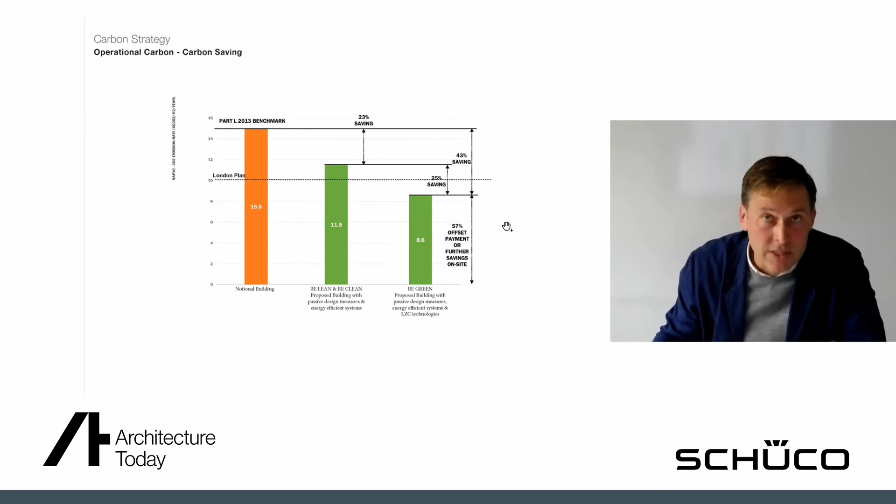The dashed line is the London Plan. Be lean and be clean takes us close to the London Plan, and being green, bringing on site PVs and air source heat pumps, gets us well below it. So we end up with a 43% carbon saving below the current industry benchmark.

And a building that we hope is, in a sense, emblematic of that. One aspect of this building which doesn't relate immediately to the carbon calculator, but is nevertheless very important to the user, is the use of planting, biophilia if you want. The facades here at upper levels are a twin skin with a planted zone between inner and outer. The lower floors, the laboratories where potentially future vaccines are manufactured, are highly visible, and because they face north, thankfully shading is not as much of a problem. There's a new tube station in the corner.

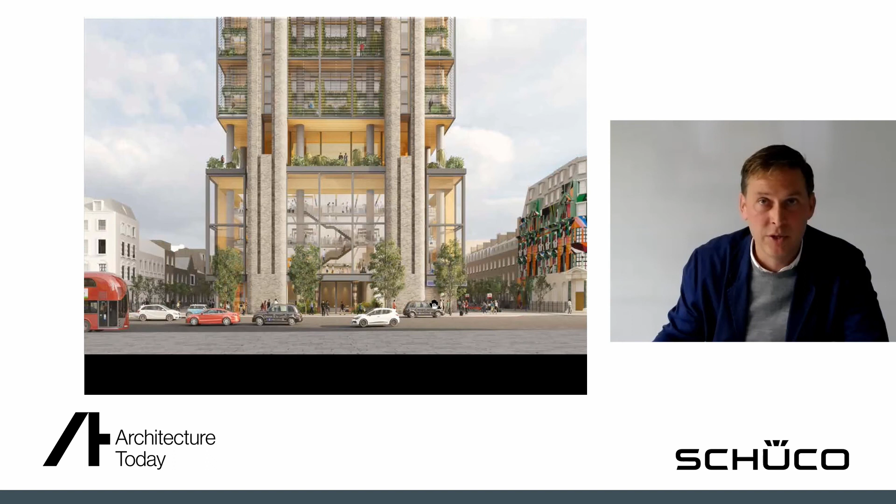So that takes me through the three case studies. To wrap up, one has to look forward to what might happen next, and we are undoubtedly at an amazing point. While the carbon and environmental agenda is critical and buildings will only get better and must try harder, I think we're also at a moment where we use the city in a different way—going back to Cedric Price's scrambled egg rather than his designs for buildings—to say that I think we will begin to use buildings and places in an ever more personalised way.

And in a sense, that is a very Cedric Price thing. I think he had a passionate desire to improve the human condition, however architecture might help to do that. But I think that ultimately personalisation and non-specificity becomes the most important way to allow buildings to stay there for a long time and therefore to reduce their environmental impact. It's not just what it is, it's what you do with it.

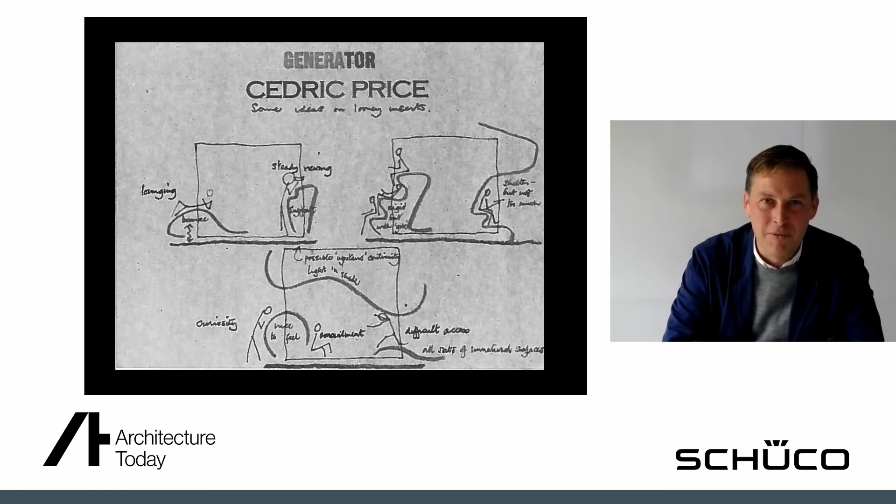As ever, I think the last word probably does go to Cedric Price. Here is an image from his sketchbooks for that generator project I mentioned earlier. I really enjoyed this little note on the side, if you can read it: shelter, but not too much. And I think in a sense that describes a condition we should all aim for in the way we use our buildings and our cities, because whatever it is we're doing, I think we have to remain as ambitious as possible, and a slight amount of discomfort always helps that process along.